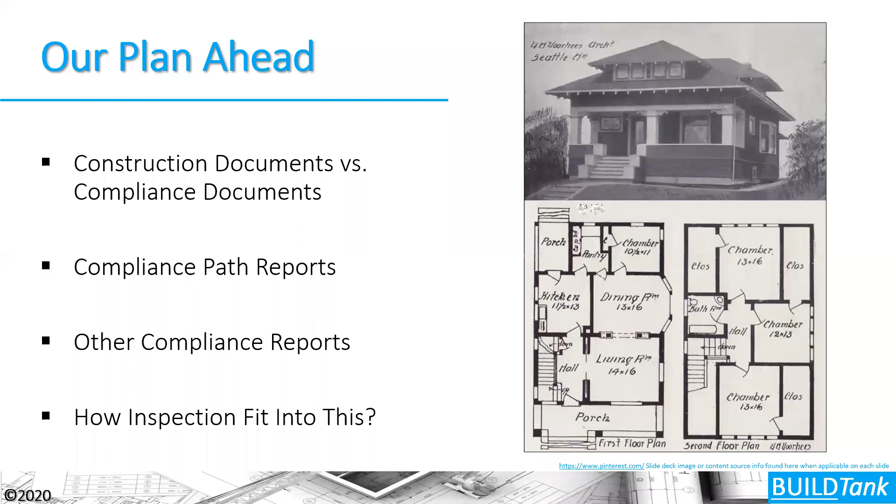So our plan today is to talk about the construction documents versus what we call compliance documents, making sure we have a good understanding between the two. We'll talk about the different compliance pathways and the compliance reports that go with those different pathways, other compliance reports, and then ultimately how field inspections fit into all of this.

As we know, jurisdictions are out there working with builders and developers to build houses. They have to look at a lot of things, and we also know that they're really not able to look at everything that the code is asking them to look for. So if we can look at and understand the compliance reports, we'll have a way to work our way through code and ensure that these houses are being built properly, without having to look at every single thing in the field that we don't have time to or don't understand.

They talk about 10 steps that we need to focus on for successful compliance, beginning with knowing which code is applicable for that particular project.

That's really interesting for a state like Colorado, where I'm based. Being a home rule state, each jurisdiction is basically on a different code. In the Denver metro area, we have about 30 plus jurisdictions, each doing their own thing. So it's very important to know which codes you're working with.

Choose the compliance path within that applicable code. Know the requirements of that applicable energy code and pathway. Design a building to meet those requirements. Document the design in the plans and specifications, and we'll add their compliance reports. Construct the building to meet the specifications, then document that the as-built building is actually built per those specifications. Then ensure that the as-built building performs and operates as ultimately intended.

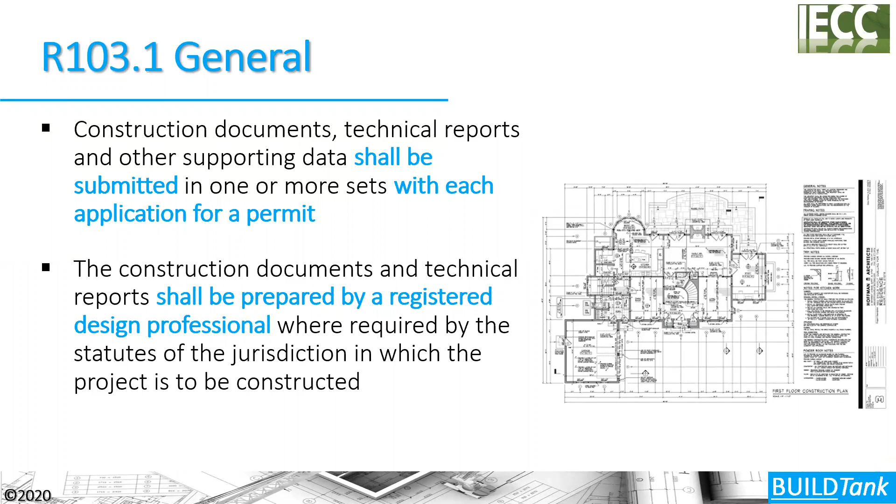They're talking about the plan set that is used to create and build that specific home from. But there's this whole other set of documents that have to be looked at too, and those are called compliance documents - we'll get to those in just a minute.

What we see is that construction documents are developed to help the contractor understand the accurate implementation of the design. These construction documents are multi-page documents. They include site plans, window schedules, sectional drawings, and other extensive details on how to flash window openings, for example. They're very important documents, but we also need to understand that they're not the same thing as compliance documents.

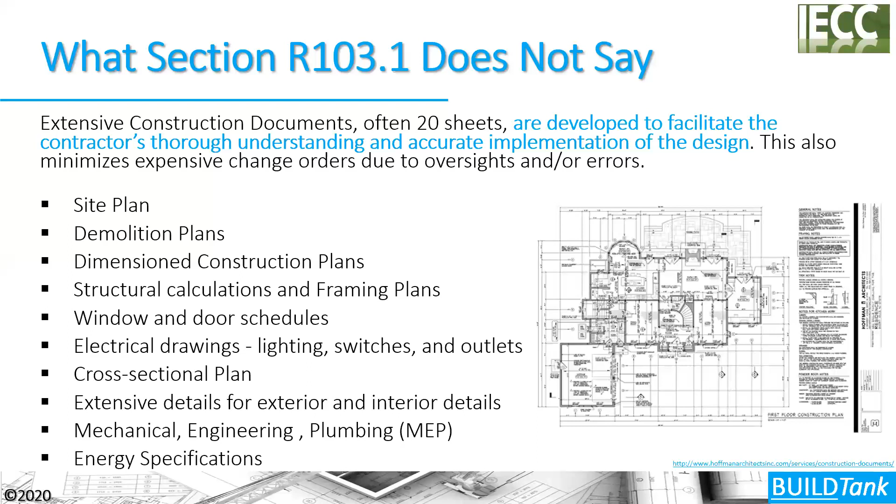These construction documents in and of themselves don't necessarily show that a home is compliant with the energy code. So compliance documents are not really discussed in the IECC, specifically not in Chapter 1 - they're in other chapters of the IECC.

The DOE says that we need to provide these documents to the code officials, yet most registered design professionals aren't the ones actually creating these compliance documents. We need to understand that it's a crucial step in ensuring code compliance, not only before the house begins, but in some cases to actually be able to issue that certificate of occupancy. We need to have that compliance document there.

So we need to submit the compliance document at the proper time, and ultimately that compliance document needs to be reviewed before the house continues in its process to get its final certificate of occupancy.

The types of compliance documents we're talking about would be an area-weighted U-value REScheck report, or there are other software that we'll talk about that develop that area-weighted compliance document, the code compliance report for the simulated performance path, and the energy rating index report for the ERI pathway through the code. We need to understand the difference between proposed and confirmed reports that are turned in at the process of permitting the house versus turned in at the process for getting the certificate of occupancy for the house.

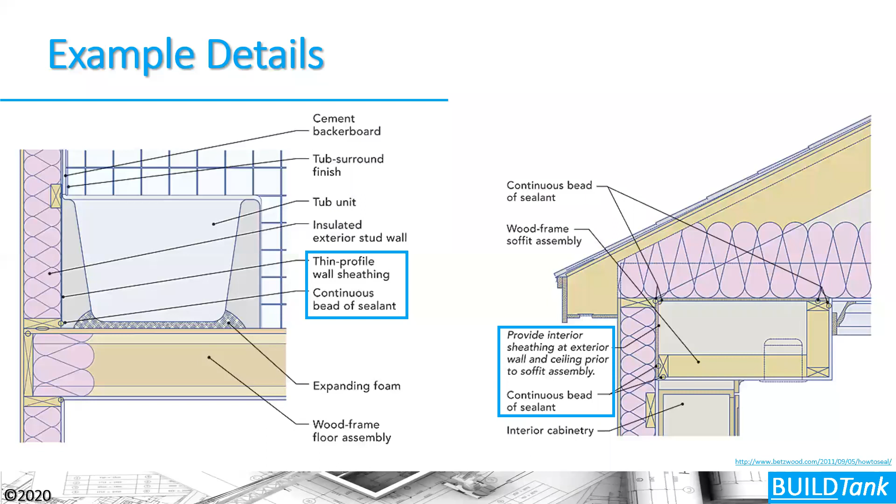These air sealing details are super important to have in your construction documents. They look like this so they can be executed properly in the field. We ultimately want things on those construction documents to serve as guidance for how to do things in the field. So to get that air barrier behind the tub on the exterior wall, to put an air barrier on the bottom chord of a truss and on that exterior wall, so that drop ceiling where the can light is located is all within the conditioned space of the house. Those are requirements of the code. These details help that implementation in the field, and as an inspector, we can go and look and ensure that those things are taking place properly.

Another thing added in the 2015 IECC is this section of the code that says the building thermal envelope shall be represented on the construction documents. This is just one example of how you might do that, but it's super important to have this depiction on the construction documents so that when it gets out into the field, the people actually constructing the house have an idea of what the designers intended, where that thermal envelope is.

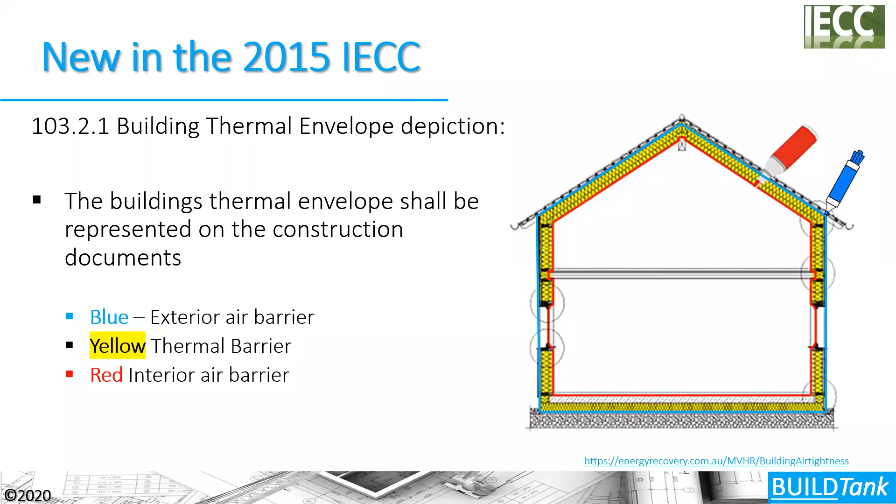We also need to understand at this stage that the IECC is super hyper focused on the thermal envelope and ensuring that it's executed properly, because so many things from a performance perspective are dependent on that thermal envelope. Not only comfort and efficiency, but remember that the HVAC design done before the house is built will not work unless that thermal envelope has been executed properly out there. So we want to make sure that is done well.

If we move on to Chapter 4 of the IECC, we see the different pathways of compliance talked about in this section. We have the prescriptive path, and within the prescriptive path, the UA trade-off path is part of that, but I like to break it out separately because this section of code utilizes software, while the true prescriptive path just utilizes the R value and U value table there. So we're going to talk about 4 compliance pathways: the prescriptive pathway, the UA trade-off pathway, the simulated performance pathway, and the energy rating index pathway, and talk about the different compliance reports needed for these different pathways.

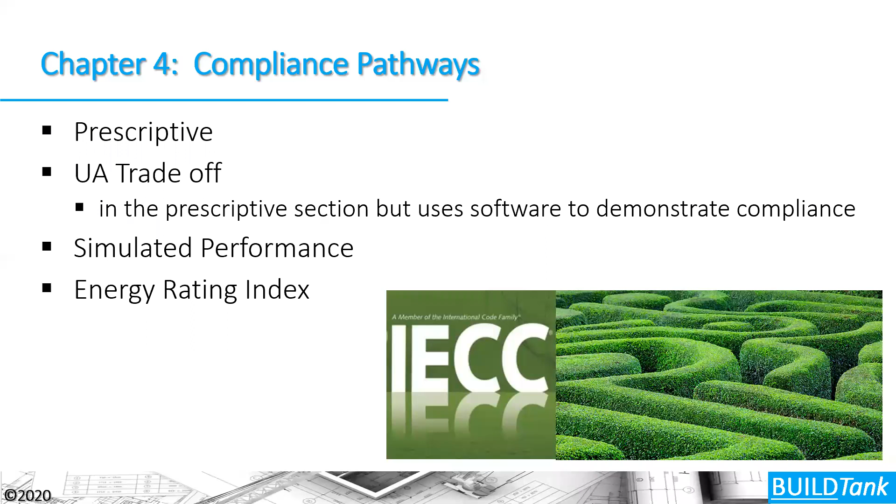If we begin with the prescriptive pathway, we see that it's the most restrictive pathway. Your only option is to do better than what's outlined in the R value table, which we'll see in a second. There's no true compliance tool for this - it's just a declaration that you make on your permit set of construction documents.

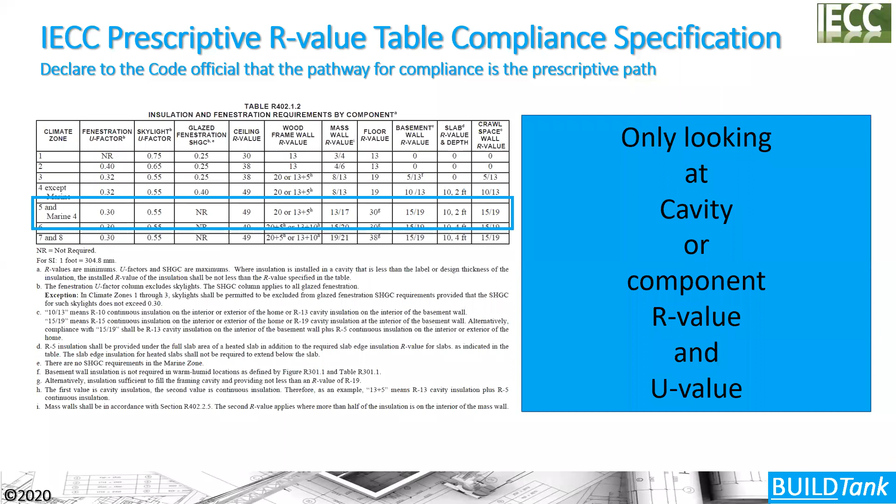So if we move over to the walls, we see that R20 wall cavity insulation needs to be installed. I can't go below R20, but I could go above it in this pathway. And again, the compliance document is the declaration made to the code official through your construction documents.

So what we're starting to see now is that an energy page is being added to our construction documents to be able to fully declare that you're using this prescriptive path. The reality is that this type of energy page is being used for all the compliance pathways. And in the 2021 IECC, there were proposals that passed saying you have to formally declare the compliance pathway at the time of permitting, which is not actually required right now. Some jurisdictions might require it, but on a national scale, it's not required.

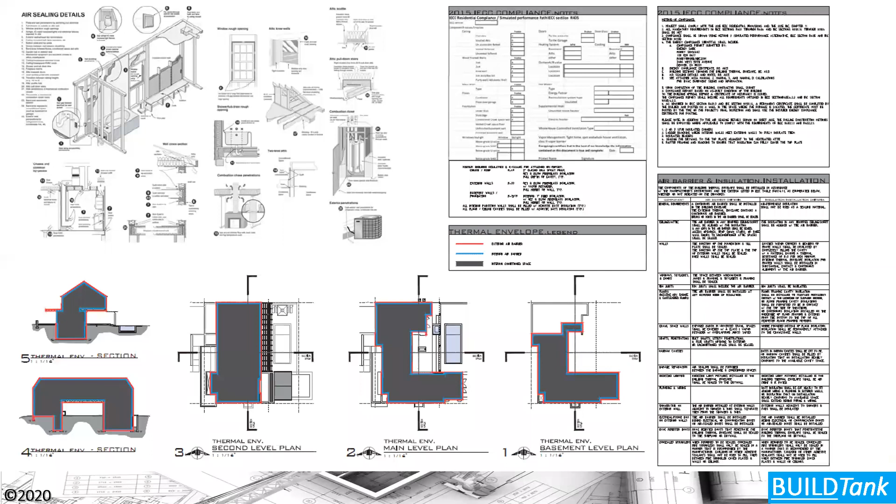So this type of energy page, we're going to break down and show you the different pieces here and how it helps demonstrate compliance.

First, here's an example of the depiction of the thermal envelope of the house. You see the blue lines and different lines here so that we can get an idea of where the architect or designer wants that thermal envelope to be. So most often you'll see it on the sectional drawings of the house.

These are air sealing details. This happens to be a Department of Energy air sealing poster that some builders or designers are adapting and using in their construction documents because it has all the main details that are talked about in the air barrier and insulation table there. Here's just a simple Excel document that documents all the R values and U values.

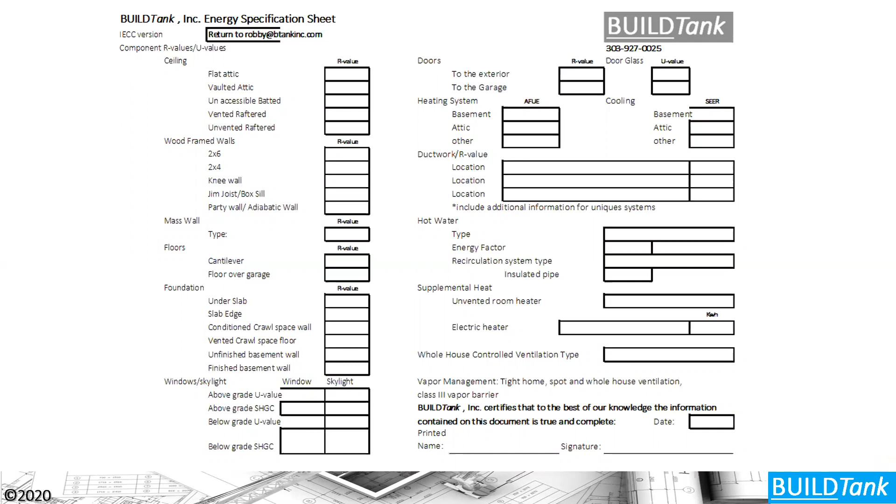These have to be in alignment with the insulation R value table of the code, what mechanical systems are in that house, what types of windows are in that house, and then if you're using third parties at all, potentially a signature would be needed.

And then there's some written part of this particular compliance document or code sheet in the plan set that is talking about other mandatory features of the code.

Do you realize that 2 or 3 stud corners are a mandatory requirement of the code? That insulated headers are a mandatory requirement of the code. This designer wanted to ensure that that information got out into the field and that their plan set documented that, so that they, to some extent, covered themselves, but also ensured that that knowledge got into the field and things got implemented correctly.

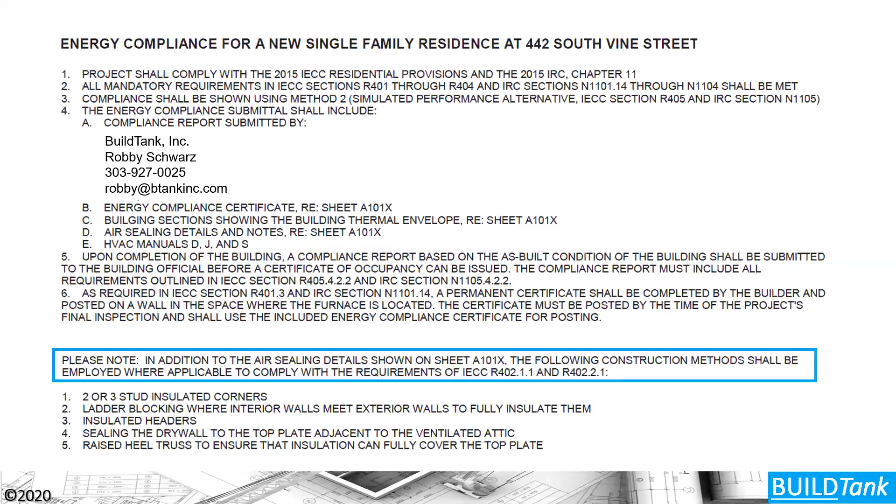So again, an energy sheet on your plan set can make a lot of sense, a good way of transferring information, but some of these things are mandatory requirements, like the depiction of the thermal envelope on the code.

Now, the U-factor alternative pathway in the code is unique for a couple of reasons. First of all, it's talking about an assembly of things. The U-factor that are in these tables is depicting an assembly U value instead of a cavity R value.

But what I want to demonstrate in this particular slide is that they're equivalent to each other. The R value in the R value table and the U value in the U value table are equivalent to each other. And I'm going to use the wall framing U value here as an example of that.

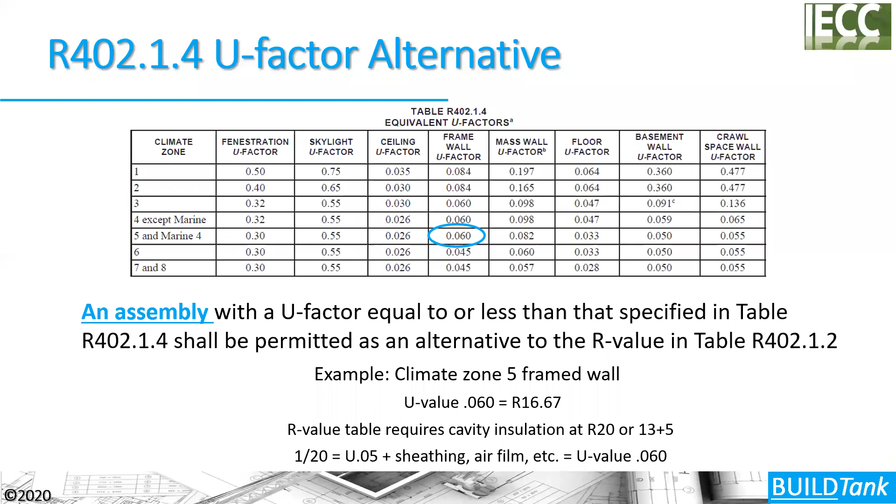So if you take the reciprocal of the U value, you get the R value. In this case, the 0.06 is equal to about an R17 wall. And if you take the reciprocal of the R20 from the R value table, you get a 0.05. So the difference between the 0.05 and the 0.06 in the U value table is the different layers there, the sheathing, the air films, all those other things give you that 1/100th of a U value.

So the reality of the U value table is that the U value table is needed in order to do software calculations. You can't basically do the mathematics that you need to do in software using R values. You have to convert those to U values, and that's really why that U value table is there.

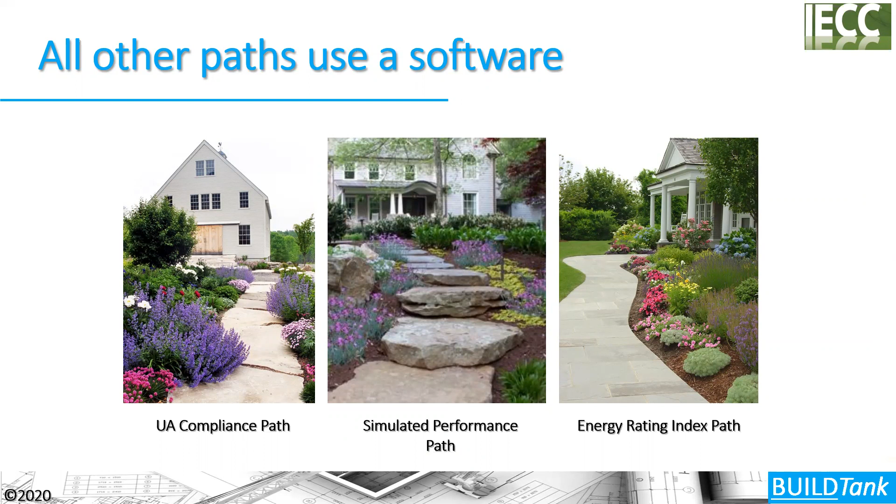And all these other pathways in the code are using softwares. The UA compliance pathway is using software, the simulated performance path, and the energy rating index pathway are all using softwares there. And how do the softwares work?

Well, ultimately, the softwares are trying to determine a delta T location. Delta T is the temperature difference. And in essence, what softwares are trying to do is create a temperature difference between inside the house that's defined by the thermal envelope, to outside the house, to ambient conditions outside the house. So the software describes the thermal envelope and its location, delta T, to ambient air and dirt.

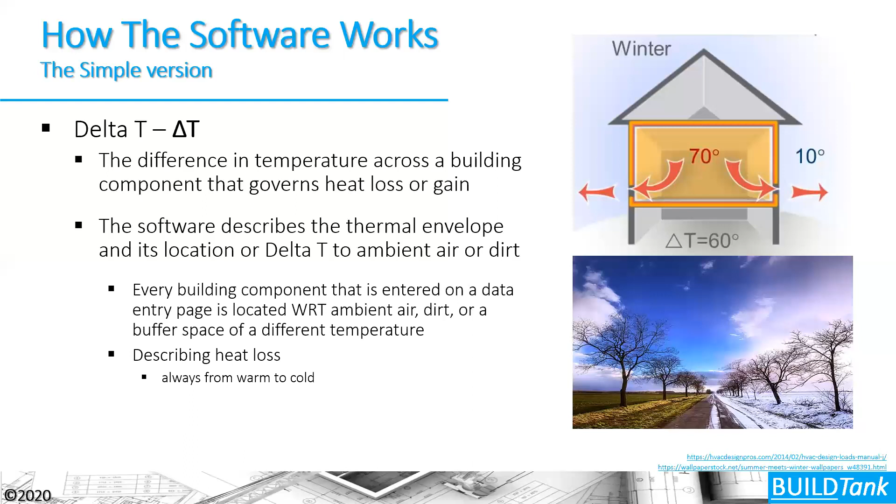Every building component is entered into the software, along with its location with regard to ambient dirt or ambient air, or what we call buffer spaces. This describes ultimately our heat loss or heat gain. Remember, heat is always moving from warm to cold. So that's ultimately what the softwares are doing.

The softwares continue by creating a reference home, which is compared to the home that we're actually rating or looking at from a code compliance perspective. The reference home is defined as a standard set of house specifications that generate a specific, consistent, and quantifiable energy performance, as defined by the code.

However, there are different types of reference homes. There are reference homes for the UA compliance path, the simulated performance path, and the ERI pathway. There's also a RESNET HERS ERI reference home, an Energy Star reference home, and building programs through utility programs have user-defined reference homes.

So how that is done is what we call the twin house concept. We have the reference home compared to the builder's home in this specific case. These two houses inside the software are geometric twins of each other. All the geometry is entered once, but two houses are basically created inside the software that are geometric twins of each other. The reference home is overlaid with the IECC prescriptive envelope R-values.

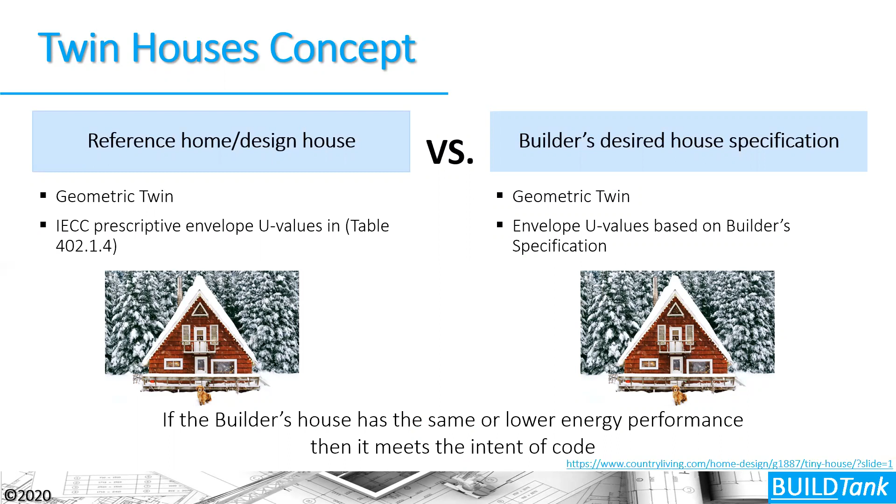You use the software. For the total UA alternative pathway, there happen to be 3 or more softwares. These are the 3 main softwares out there that can demonstrate compliance: REScheck, REM/Rate, and Ekotrope. We often call these reports a ResCheck report, but the reality is that ResCheck is the software, not the compliance report.

I'm going to start with the ResCheck report and look at what we need to check if you're going to get this report for the area weighted U value compliance metric. The first thing we need to know is what code we're working with. In this case, we're working with the 2012 IECC.

We need to know that ResCheck only supports the last 3 editions of the code, so the 2012 will fall off as the 2021 cycle comes on. You won't be able to use ResCheck for older codes, which is basically an incentive for jurisdictions to keep moving forward.

We want to double check the locations and conditioned floor area, glazing, and all these different things that are talked about in the project information. Ultimately, this first page is telling us if this house complies or not, showing compliance if it passes or fails the UA trade-off path.

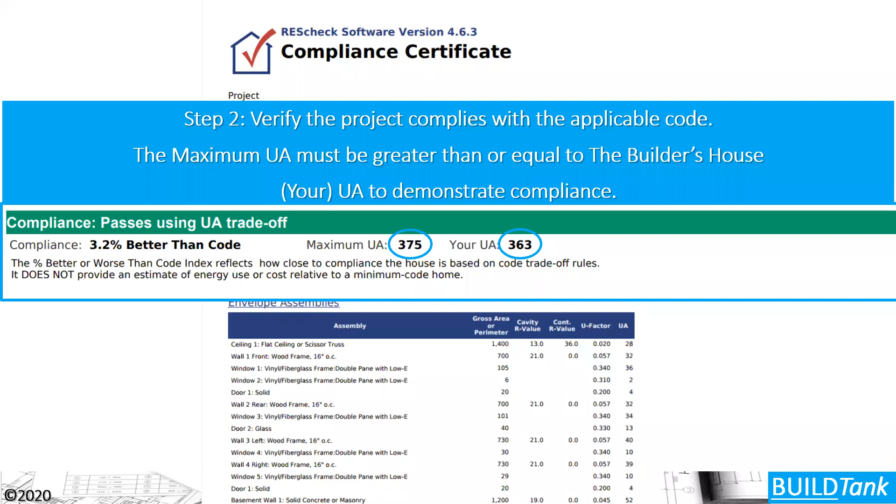That's not all we need to look at, however. We want to make sure that they created this report well, so we want to look at some of the envelope inputs that were done for this report. We can look at the envelope assemblies and see what different features they used in that assembly.

For example, if this house had a vented crawl space, then the crawl wall would not be part of the building envelope and should not be shown on the report, because your thermal boundary would be defined as the floor system above the vented crawl space.

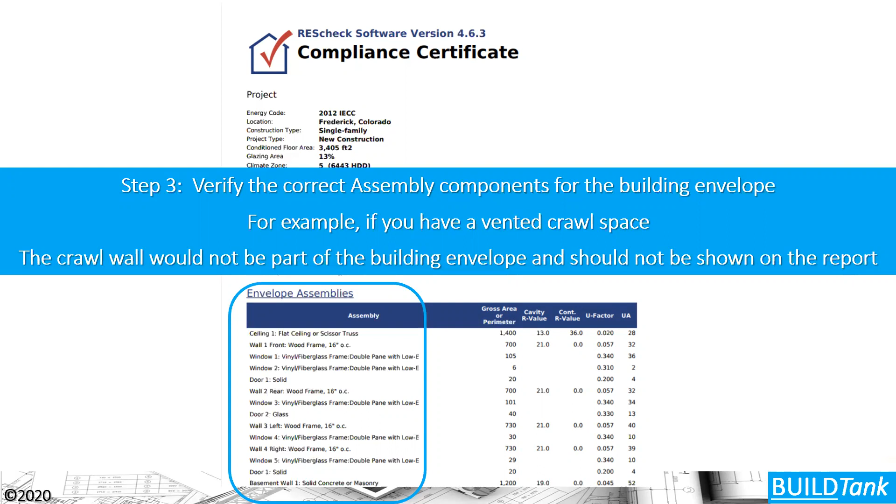Those types of things should be looked at and reviewed when you're looking at this compliance document. Next, you might look at the gross areas to make sure they did their takeoffs right and didn't make a mistake when typing it into the system here.

For example, the ceiling, flat ceiling or scissor truss ceiling is 1,400 square feet. What if they accidentally put in 14,000 square feet? That could make a big difference in compliance. So you want to double check quickly that their takeoffs were within range. They don't have to be exactly matching between different people. If you had 9 people doing takeoffs, you'll probably get 9 slightly different answers, but they need to be within reason there in essence.

Next, we want to verify the R values and U values that they entered here. When you enter the R values, they get converted into U values. If you're entering window U values, they just stay as U values. But ultimately, you want to verify the R values shown on the building plans meet the R values being depicted here on the compliance report.

What's interesting here is how things are entered into the different softwares. So this is a flat ceiling ventilated attic, so there is some cavity insulation and some continuous insulation. From the bottom chord of the truss, in this case a 2x4 bottom chord, that blown insulation that fills the cavity between the bottom chords of the trusses, that would be cavity insulation. And then the insulation that covers the bottom chord of the truss, that would be continuous insulation.

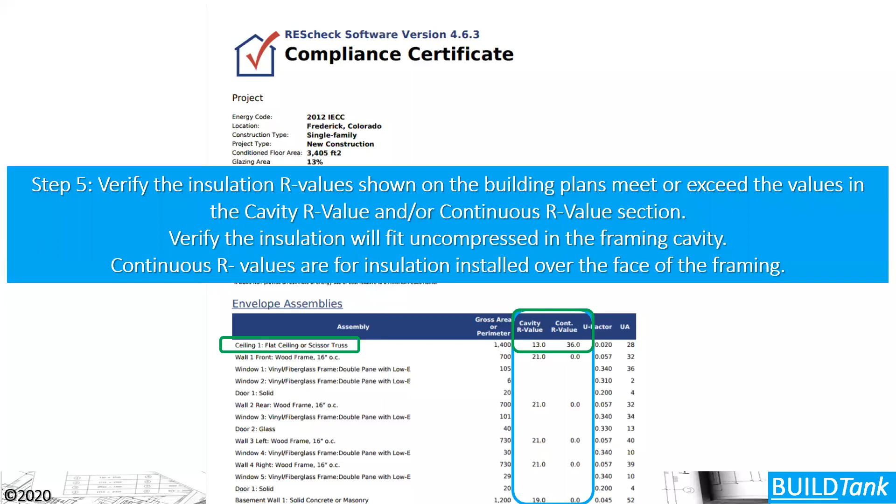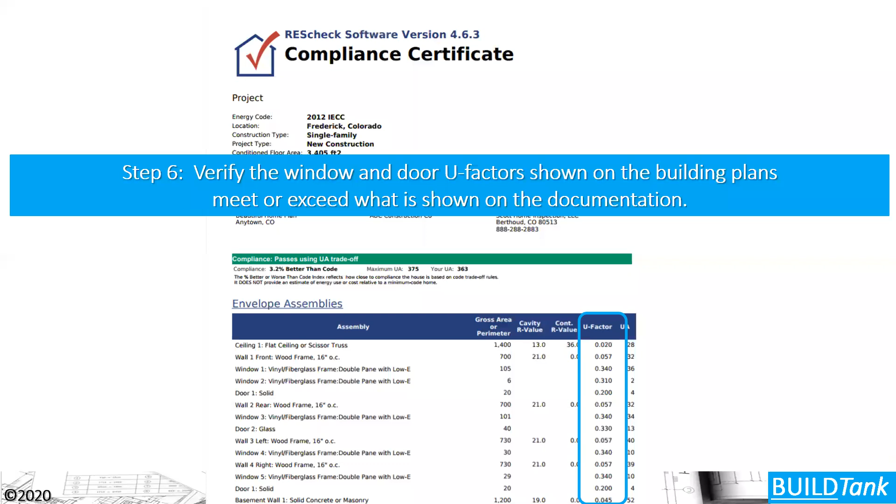In this case, they have a total R49 installed in that attic, and you can see how it gets converted into the U value there as well. So the next thing you would check would be those U values to make sure that happened correctly in the software calculation. You could also look specifically at windows, because windows are only entered as a U value there as well.

Now, as I was saying before, ResCheck is one of many softwares that can create these UA compliance reports. So what I've put up on the screen here are compliance reports for the UA compliance path from Ekotrope and from REM/Rate, two other softwares. These are valid and can be turned in for compliance of the code.

They look a little bit different than ResCheck reports, but they also give all the information you need, starting with demonstrating that this is a projected report. In the UA compliance pathway, it only asks for this report to be turned in for permitting, so it's projecting what will be carried out in the field. We need to be certain we're looking for the inspection status that's projected on these reports.

We have the reference home detailed out here, showing the area weighted U value of the reference home and what the designed house, or the builder's house, is. We're looking for the designed house to have a lower or equal area weighted U value to the reference home. In both these cases, that's true, and in both cases we see they document that the as-designed house meets or exceeds the requirements of the prescriptive compliance path using area weighted U values.

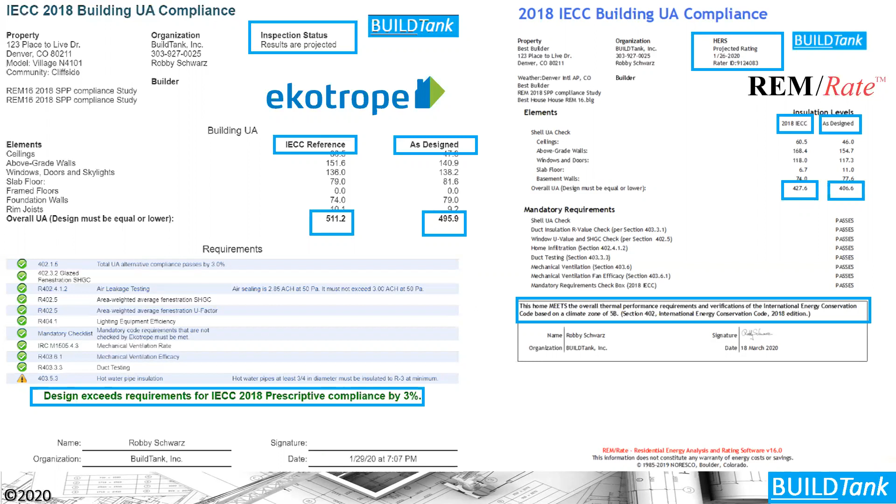Now, what this report doesn't do is give you the details of the assemblies used to demonstrate compliance, so you're going to have to get a separate report. The code calls for an energy code inspection checklist that gives you that information, and from all of these softwares you can get an energy code inspection checklist. This is just an example of that checklist.

So the checklist gives the property information. It also gives the status again, the results showing this is a projected report that hasn't been confirmed out in the field. It also gives organizational information, who actually created these reports, and then it gives general building information.

Again, this might be something you want to confirm, that the conditioned floor area and the volume are within range to what you might get when you do a takeoff of the house. This section I'm going to blow up and read because it's interesting, and not a lot of people actually spend the time to look at it on these compliance reports.

This says that the building energy model in Ekotrope reflects the building assemblies and energy features listed below. Sometimes energy features will change in the field from what has been modeled. The inspection process should identify any changes and ensure that the home continues to meet the applicable energy code. So again, being a proposed document, you have to wed this document with your field inspection to ensure you're getting a compliant house there, because things might change.

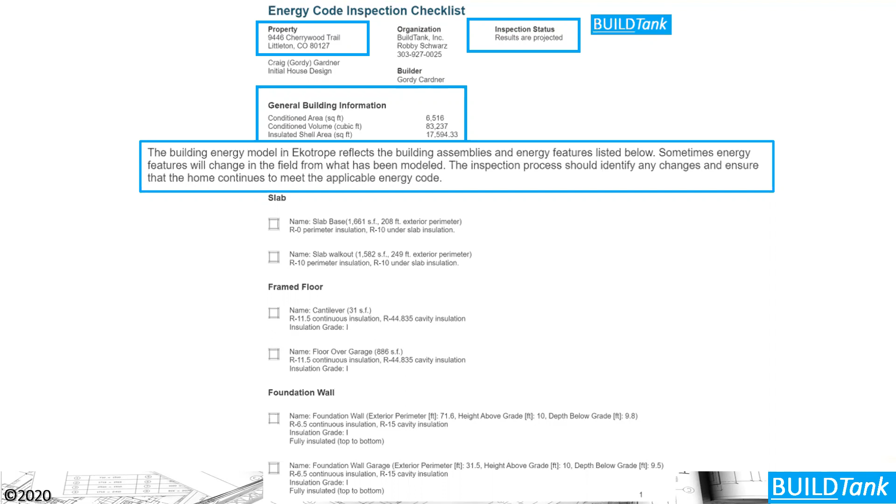We see that often in houses, especially with windows or sometimes even with insulation in different components of the cavity. They might say they're putting in a 0.34 window in the home. You go out there for inspection, you actually see that the predominant windows are 0.32. Well, that's better then, so that's okay. But what if they were 0.36? Would that still be compliant with the code? We need to look at that from a field inspection perspective using this pathway in the code.

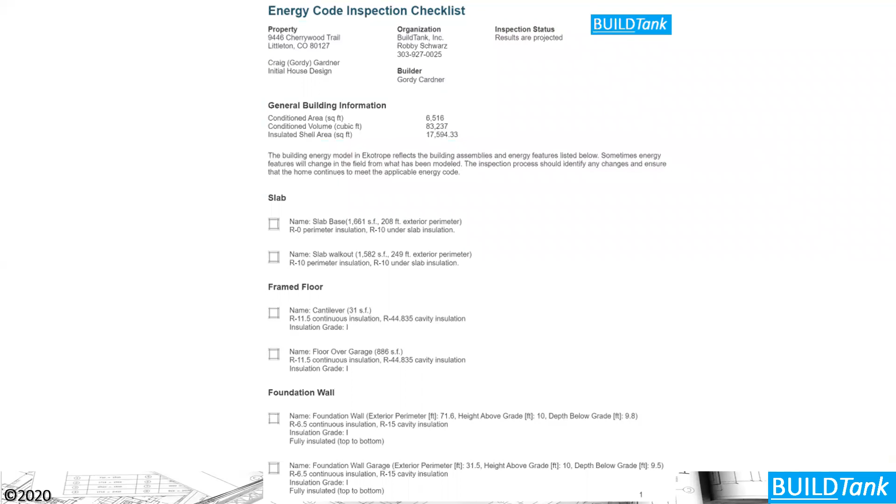Now this checklist goes on and talks about the different components of the checklist, and we'll go into those in a little bit of detail. In this case, we're talking about slabs, and it gives us an example of the square footage of those envelope components. In framed floors, it gives us an example of the R values used in those components. And then we also get indications of cavity and continuous insulation used in those different components to demonstrate compliance here. So we can use this checklist in the field to work our way through the house and demonstrate compliance with the area weighted U value pathway.

Now the Energy Code inspection checklist also talks about mechanical systems and mechanical ventilation. If we blow that section up, we see that mechanical ventilation has been modeled and needs to be looked at in the field, and the mechanical equipment for heating, cooling, and water heating has been included in this report so it can be confirmed during inspections out in the field. So these compliance documents not only need to be looked at for permitting, but we need to look at them also when we go out in the field and inspect the house to make sure that they relate to each other.

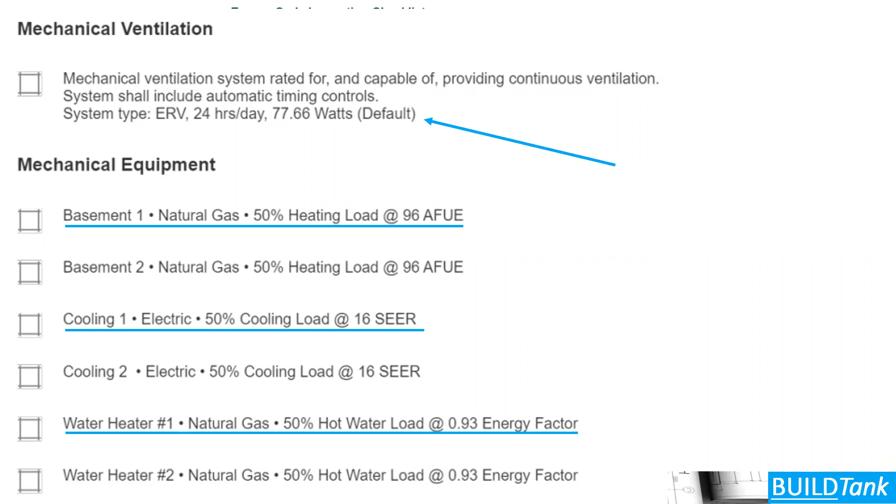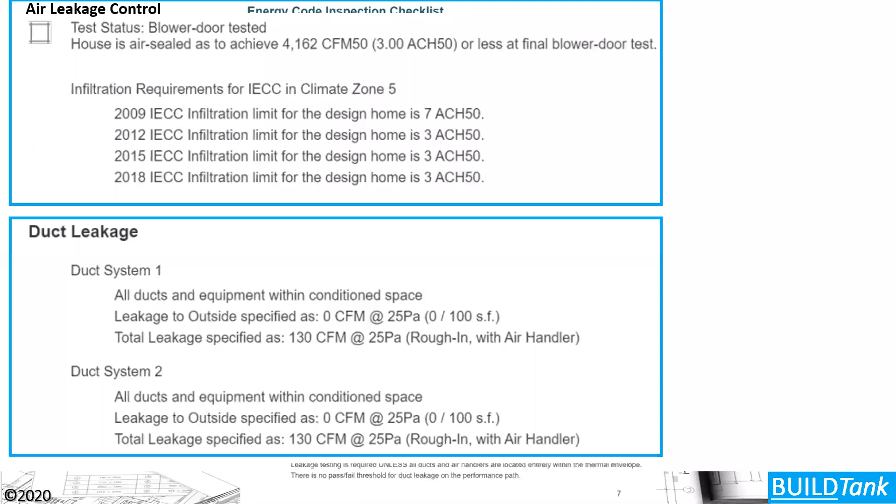Lastly, this inspection checklist looks at air leakage and duct leakage sections of the code. Air leakage is now a mandatory test that has to happen in the code. Duct leakage is dependent on where the ducts are located, but this section of the checklist is reminding us that we need to look at those compliance reports, and those reports most likely are going to come at the end of the process. So you're going to need to look at them before the certificate of occupancy is released for that particular house.

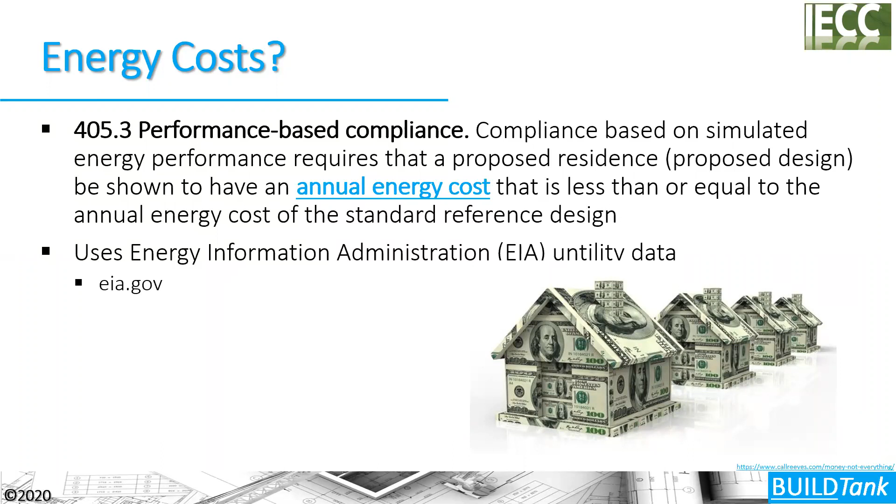Okay, so now let's move on to the simulated performance path and look at the reports here. Now the simulated performance path is also a software pathway through the code. Instead of using annual or area-weighted U values as the compliance metric, it's using annual energy costs as the compliance metric to demonstrate compliance here. So again, the rated house has to have less than or equal annual energy costs than the proposed house or the reference home for that particular house.

Now the compliance reports are detailed out in more explicit detail in this pathway than in the area-weighted U value prescriptive pathway. The compliance software tool generates a report that documents that the proposed design complies with this section of code, but it goes further and says that the compliance reports need to include certain things in order to issue the building permit, and that's in section R405.4.2.1. And then also that you have to submit a compliance report to get your certificate of occupancy, and that's detailed out in section R405.4.2.2. So let's look at these reports a little bit.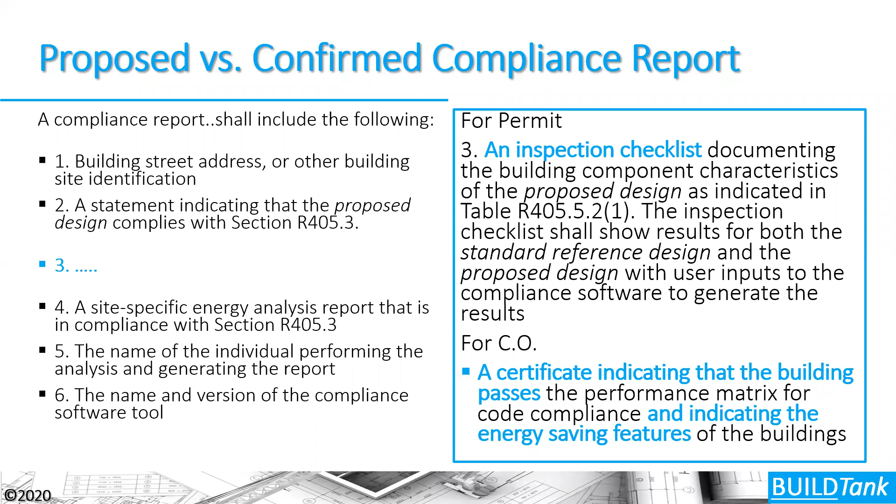They need to review those confirmed reports as well. So compliance reports for the proposed design show that it meets. We have the property information here, the status showing this is projected for the building permit, and this report shows that it meets or exceeds. We're using annual energy cost, and we have to show that the as-designed annual energy cost, $1,034, is less than or equal to the reference home at $1,086. Therefore it meets the code—in this case, 4.8% better than required.

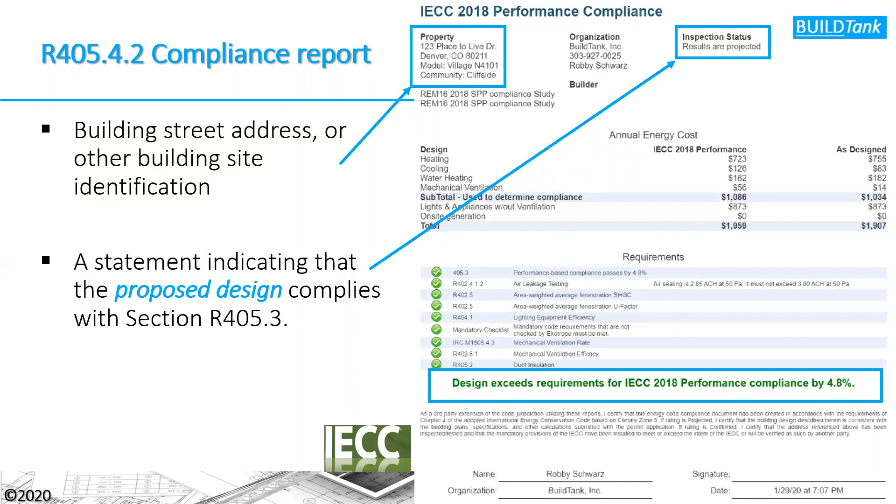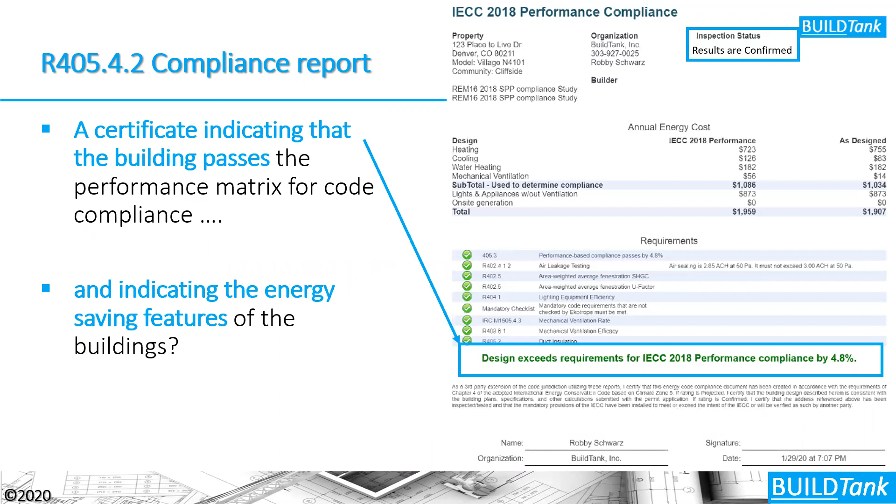The certificate indicates that the building passes, which we showed again here, and it indicates that it's confirmed in this case. So the compliance report for the certificate of occupancy is the same report we showed for permitting, but the status changed—it now shows results for a confirmed house, not a proposed house. Things have been looked at out in the field in that case.

Now, it also says we have to indicate what the energy saving features are. There isn't a specific report in any of the softwares that's suggested to demonstrate the energy saving features have actually been installed. So I chose the building specification summary sheet report to do that. I think it does a pretty good job of detailing the building shell features, the mechanicals, the lighting equipment, and the size of the house. It does the job we need.

You also want to ensure that the inspection status doesn't say projected—it should say confirmed in order to turn this in for the certificate of occupancy. But this is a good report to use for that purpose.

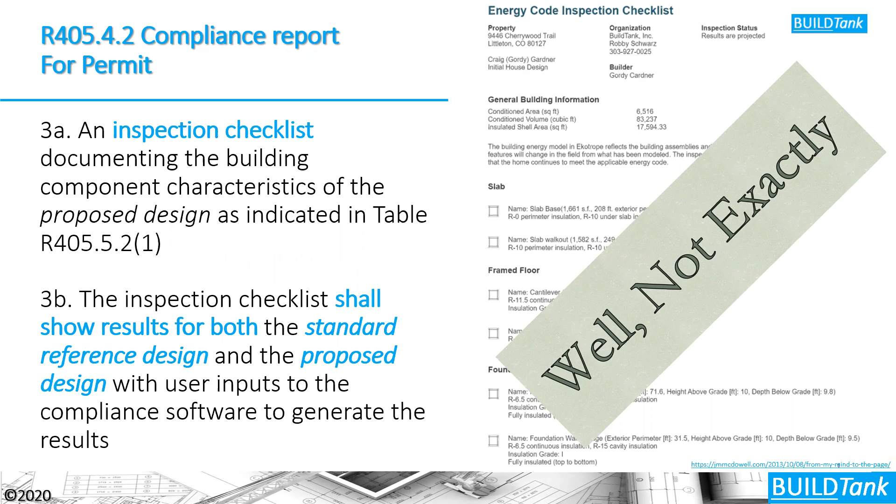Now, compliance reports for permitting—the inspection checklist, which we went over earlier, shall show the results of both the standard reference design and the proposed design. So that's a little bit different. You might turn in the inspection checklist, but you also need to turn in a different report, because the Energy Code inspection checklist doesn't do the second part, the 3B part, which asks for looking at the features turned in for the reference design and the proposed design.

So the softwares have the ability to break out the proposed home summary and the reference home summary. These reports are titled so you can know the difference between the two, and then you're going to have to look at what's actually been put into each location for the R values and U values in that particular report.

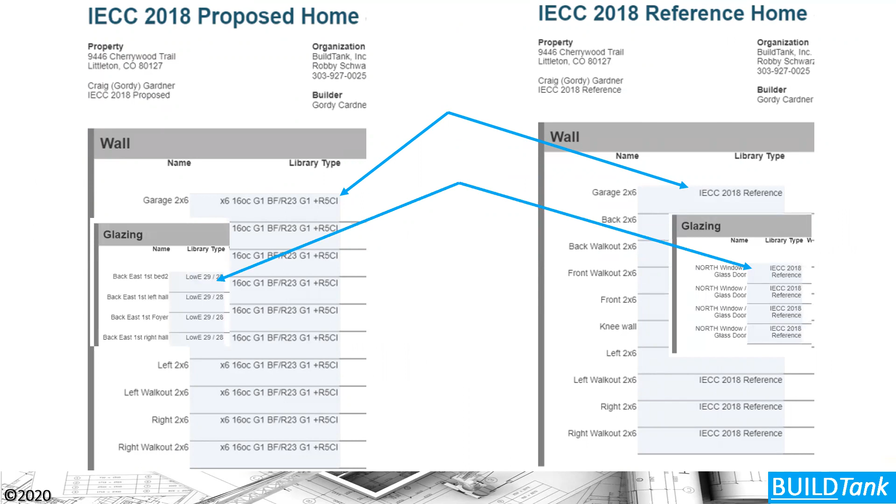Let's blow that up a bit more. We can see that the IECC reference home features were used in the reference home, and the proposed design, in this case, used the 2x6 wall R23 blown fiberglass grade 1 with R5 continuous exterior sheathing. This is for a cold climate, so it's probably not what you'd see down in Texas. We see similar things looked at for glazing, roof insulation, and whole house infiltration. All the different components to demonstrate compliance are broken out in these reports for the reference home and the proposed home, so you can see what was used in each component.

So that's the type of report the code is specifically looking for from the softwares, and they're obviously available in the softwares—they just aren't always turned in to be reviewed.

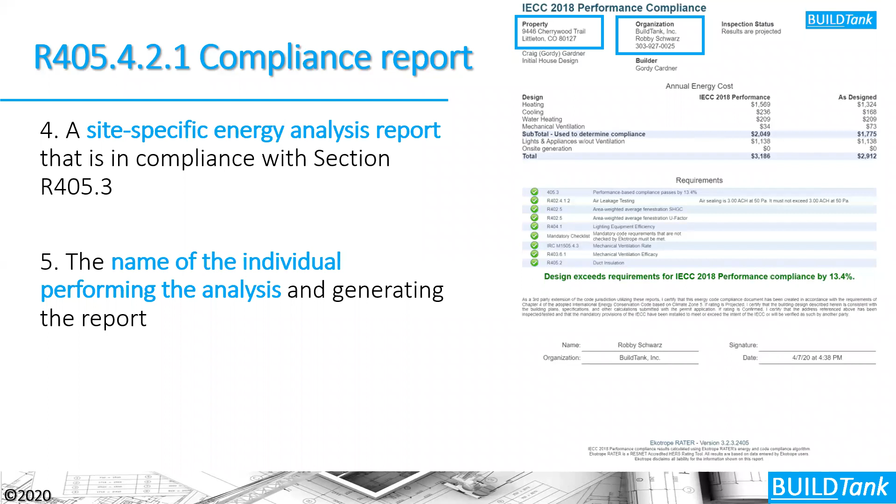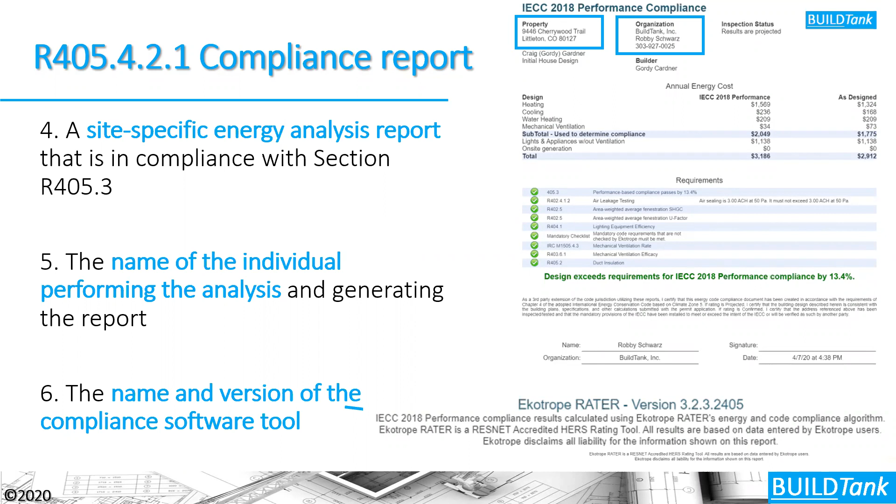Now, the compliance report is looking for a site-specific energy analysis report. This is the compliance report for the Certificate of Occupancy. So we have the property address, the name of the individual performing the analysis, and the software tool that's used. Making the text a little larger, we see that this report is generated by the Ekotrope RATER software, and the version number is listed there as well.

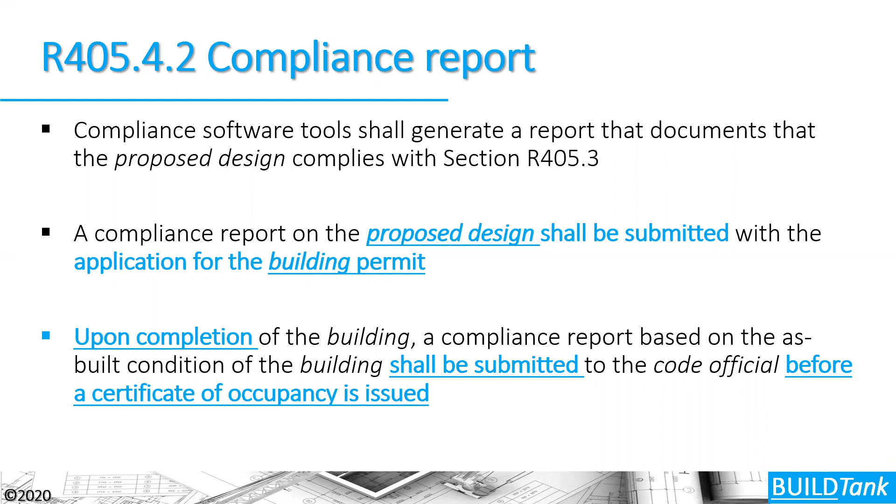The compliance reports, again, need to be broken out for the proposed design. It needs to be submitted for the building permit, and upon completion, the compliance report needs to be submitted for the Certificate of Occupancy to be issued and released.

So for projected and confirmed reports, we need to look at this section here. Is it for the projected reports, and has the report been signed? This section is one that a lot of folks don't look at, specifically because when you're confirming the house in the field, we need to understand who's actually doing that confirmation. So if a third party is doing this confirmation, we need to understand what this says.

I'm just going to read it out loud here: 'As a third party extension of the code jurisdiction utilizing these reports, I certify that this energy code compliance document has been created in accordance with the requirements of Chapter 4 of the adopted International Energy Conservation Code in Climate Zone 5 in this particular case' — that would be made specific for whatever climate zone the house was being looked at in. 'If rating is projected, I certify that the building design described herein is consistent with the building plan specifications and other calculations submitted with the building permit application. If the rating is confirmed, I certify that the address referenced above has been inspected, tested, and that the mandatory provisions of the IECC have been installed to meet or exceed the intent of the IECC, or will be verified as such by another party.'

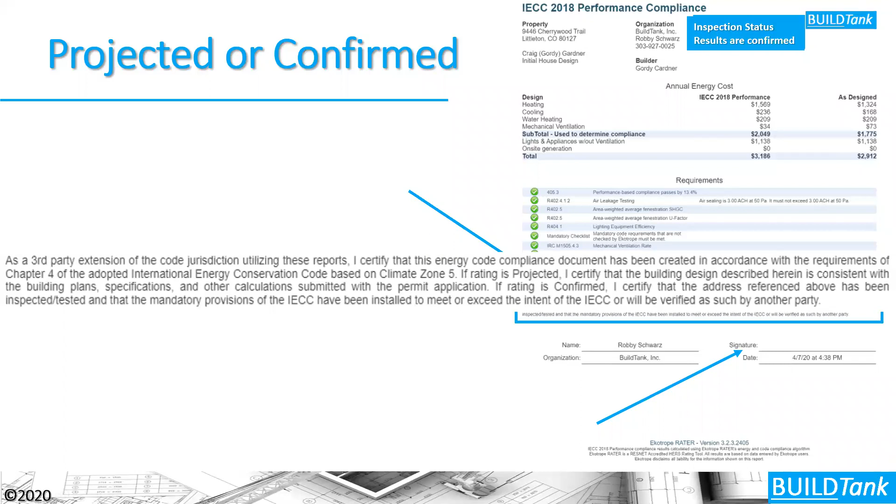Okay, energy rating index pathway. The first thing we need to understand is that the energy rating index is not the same as a HERS or ResNet energy rating index. So we have to be particular about our language and use adjectives to describe the type of energy rating index. When code adopted the energy rating index, they did that because ResNet's HERS index is a proprietary term, so they're not going to use HERS index.

We also need to understand that the index has changed from the 2015 to the 2018 to now the 2021 cycle. So we need to use that modifier that says we're talking about the 2018 energy rating index in this case, not a HERS index, not the 2015, and not the 2021 index pathway.

These are the scores required by the two different codes currently out there, the 2015 and the 2018. You can see the scores are different, but if you did a HERS index for a house complying with the 2018 energy rating index pathway, you'd see that the HERS energy rating index can also be different. I've seen it differ by as much as about 18 points from the code energy rating index. So it's important to know that you're talking about the correct energy rating index here.

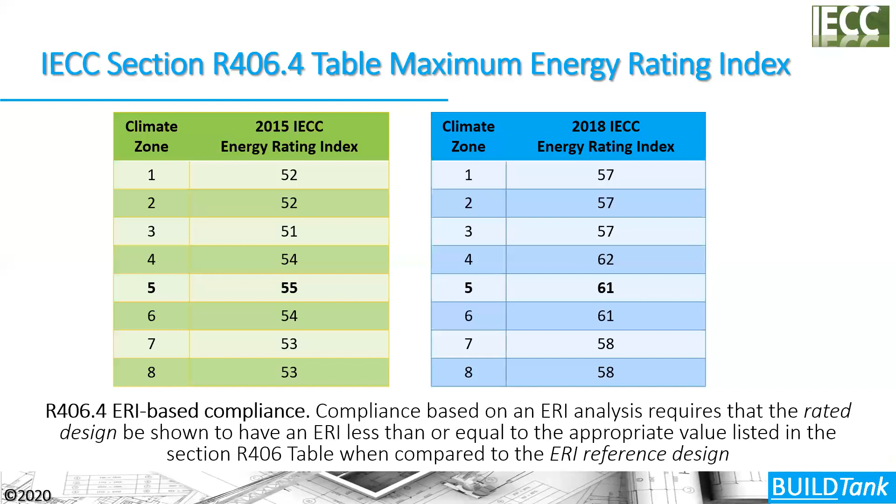So the compliance software tools — the code goes into a little more detail here, saying they shall generate a report that documents that the energy rating index of the rated design complies with the section we just talked about.

It also needs to list out the address and provide an inspection checklist. It needs to show the rated design, but also the reference design as well—both the ERI reference design and the rated design need to be documented in compliance reports. You have to document the individual who completed the reports and the name and version of the software as well.

So this is the true compliance report for the 2018 IECC. This is projected, so it should be turned in for permitting. Right now the IECC only says you have to provide one of these reports for permitting—it doesn't specifically say you have to turn in one confirmed for issuance of the Certificate of Occupancy. In the 2021 IECC that will be required, but right now it's recommended. I'd recommend getting one for permit and also one before you issue the Certificate of Occupancy.

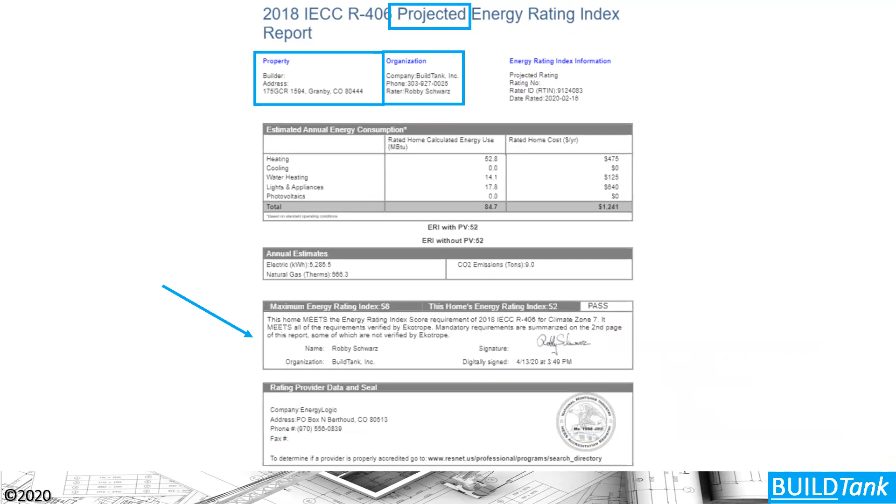We have the property organization—the people who created this document—the property address for that document, and then we ultimately show compliance. I blew that document up as well. It says this home meets the energy rating index requirements for this section of code. In essence, it scored 52 in this case without PV, which is better than or equal to the 58 required in this climate zone. So that needs to be turned in.

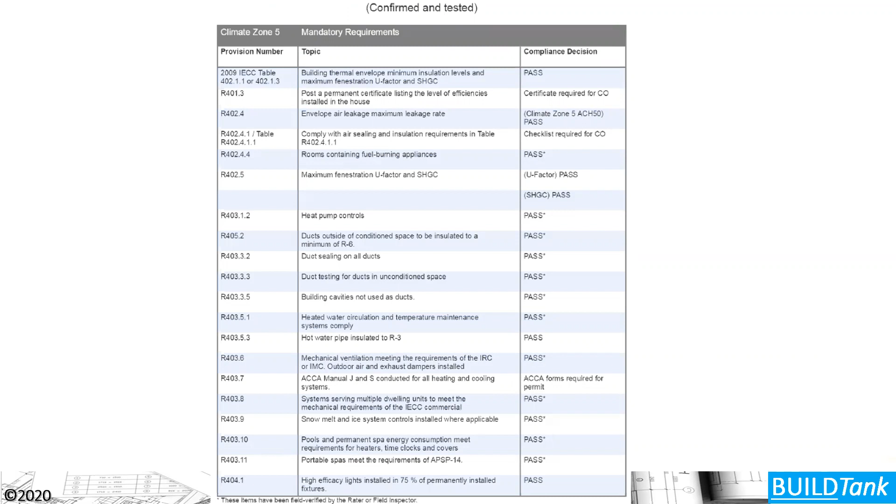The second page of this report talks about all the mandatory features that are required regardless of the pathway you choose to use, and this report will document those features and whether they passed or not.

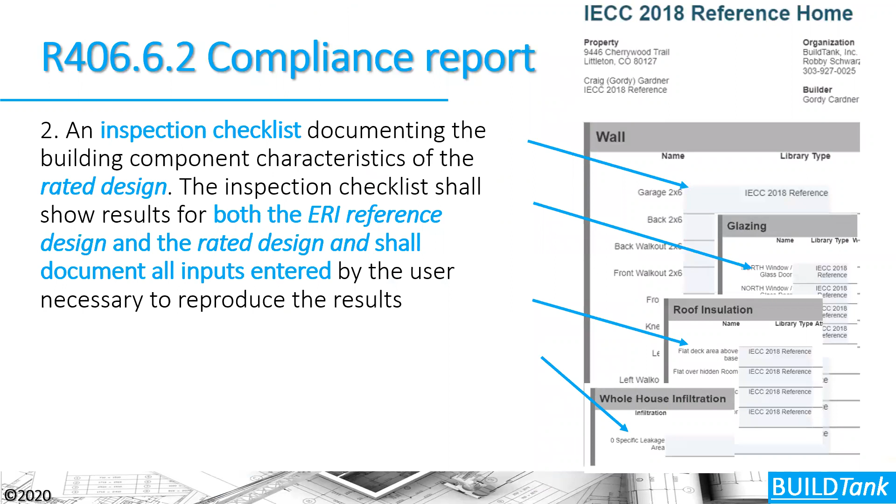Now the compliance report is asking for the rated home and reference home documentation here—that's the documentation we looked at before, the proposed home summary and reference home summary reports, looking at the different specifications for each detail from foundation, slab, walls, infiltration numbers, duct leakage numbers. All of those things are detailed out in these reports, and they should be turned in for permitting at minimum, potentially also for Certificate of Occupancy depending on the jurisdiction.

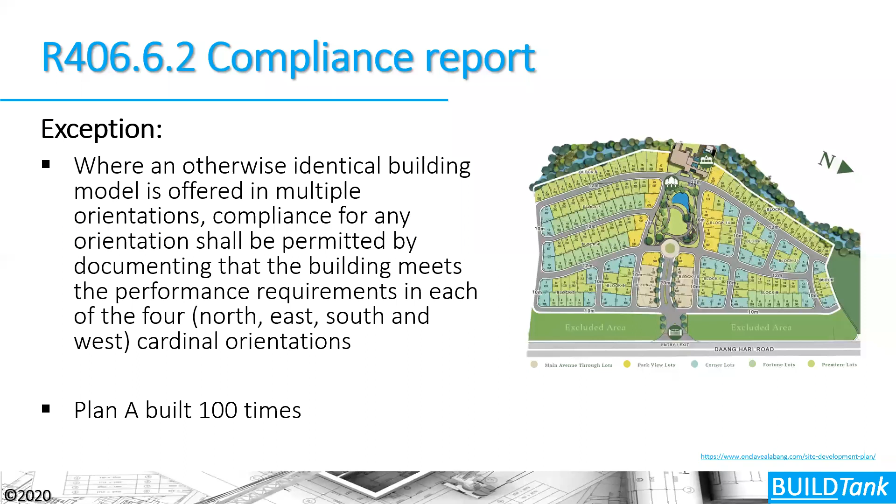There is an exception for the compliance report. It says that where an otherwise identical building model is offered in multiple orientations, compliance for any orientation shall be permitted, documenting that the building meets the performance requirements in each of the 4 primary cardinal directions. So if you build Plan A 100 times in a specific community, you don't need to turn it in 100 times—you can turn it in for the 4 cardinal directions and demonstrate compliance for permitting purposes.

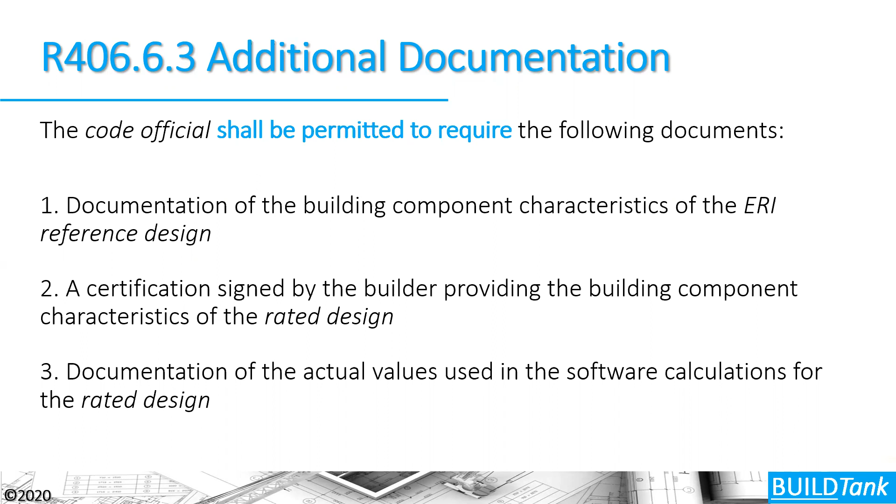Additional documentation—again, the code official always has the right to ask for additional documentation, and these are some examples of that: the reference design and the rated design, which we showed you, and so forth and so on.

Other reports needed to document compliance—let's look at those real quick.

Chapter 3 talks about needing documentation to prove what's actually been installed from an R-value perspective. So we shall provide a certificate listing the type, the manufacturer, and R-value of the insulation installed, specifically for insulation that doesn't come with an R-value mark. This is very, very important. Right now it doesn't specifically say when this document needs to be provided, but I always recommend it's provided at the time of installation of the insulation, especially if you're blowing your walls with insulation—who knows what the R-value of that blow is?

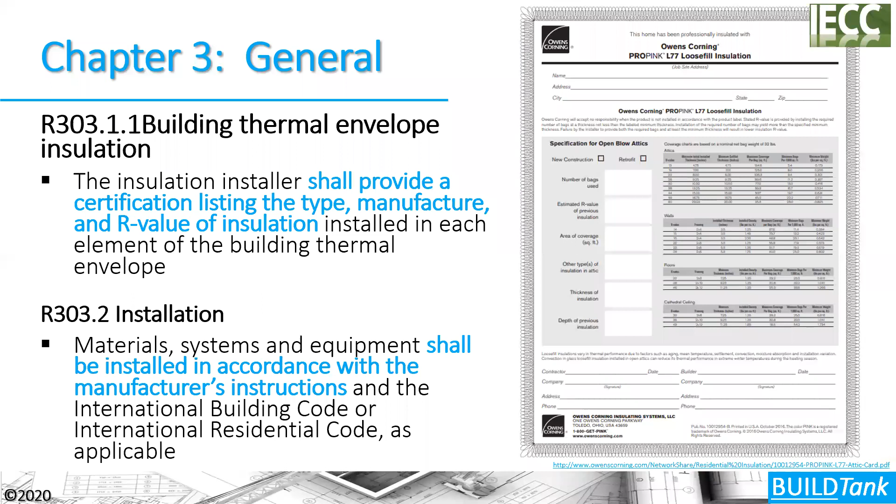So in essence, the installer is certifying with these types of documents what the R-value is, and also certifying that they've installed it according to manufacturer's instructions and the required density. This is a very important report to look at, especially now since we have so many installed materials where we don't know the R-value—there's no R-value mark on the material.

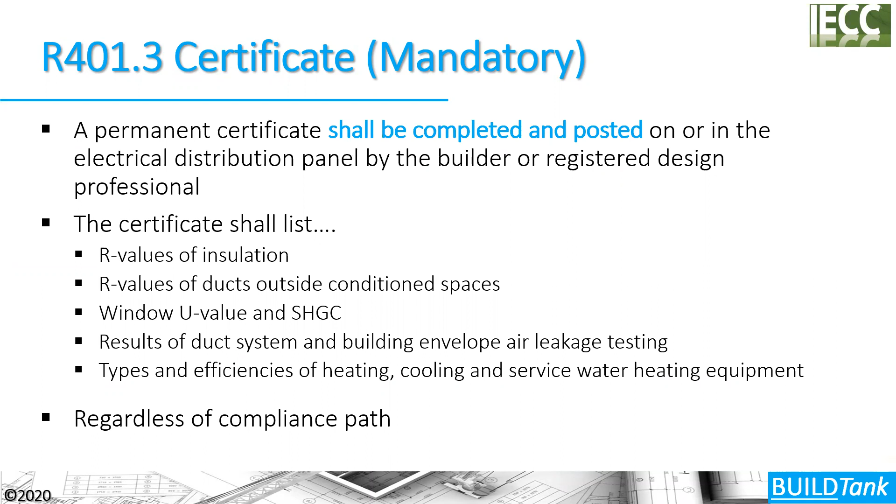Chapter 4 says a different certificate needs to be completed and posted. It says here in the electrical distribution panel, but we're seeing most people want it installed in a prominent location. This certificate needs to detail out the R values and U values of the building thermal envelope, the results of duct leakage and building leakage testing, the types and efficiency of the heating and cooling systems, and it's required regardless of the compliance path that is used.

Now, there isn't a standard way to create this certificate for the prescriptive path of the code, although it's also required for the prescriptive path. So we're getting all kinds of handmade certificates right now for that pathway of the code. But you do need to look for it.

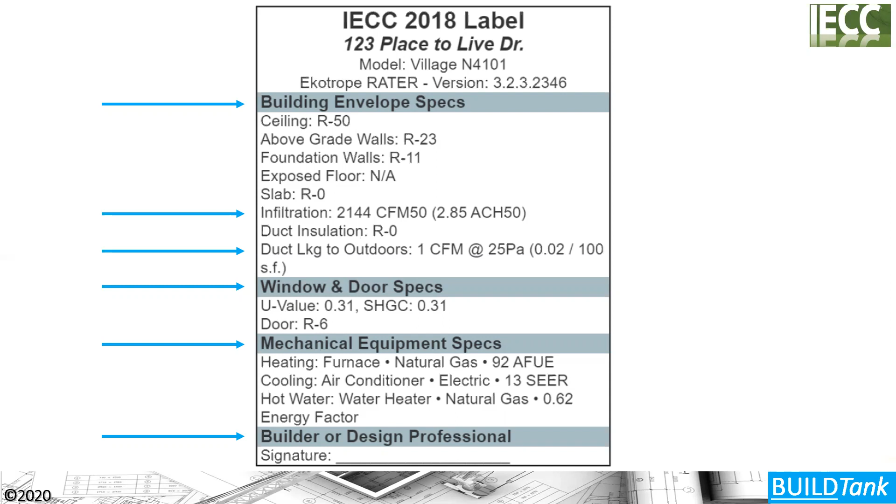And then you need your testing reports for your blower door test to ensure that it passed. This report needs to be looked at before a certificate of occupancy is released. We're seeing, unfortunately, some jurisdictions that aren't looking for it, and some that are issuing certificate of occupancy for houses that haven't passed. This is one example of a report where that information shows up, on this overall certificate that shows the house passed.

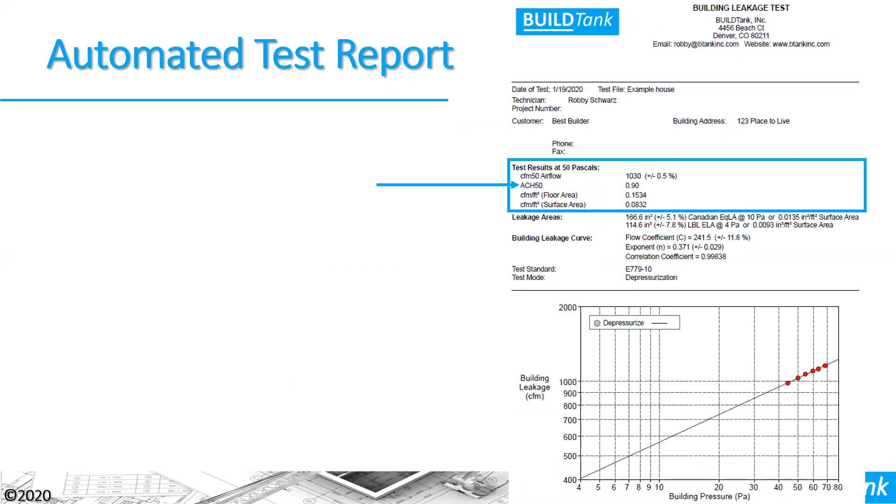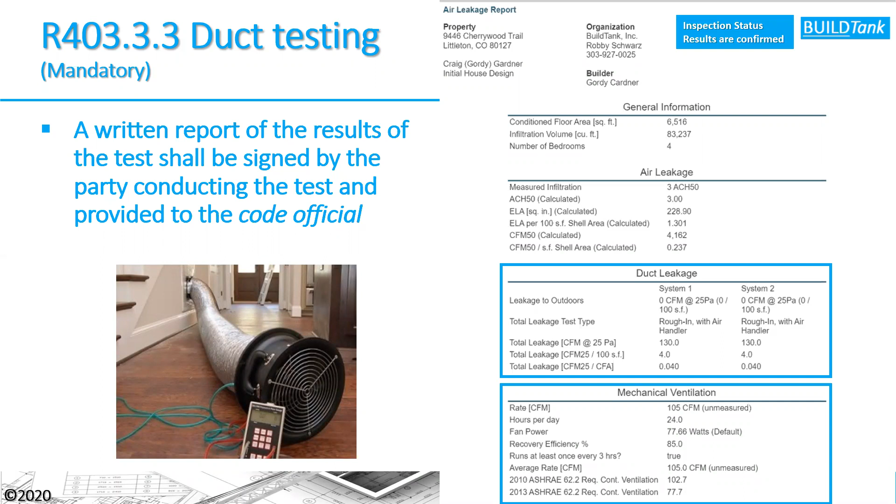A written report has to be given for duct leakage testing as well, if that's part of the code. Again, is it projected or confirmed? You want to make sure you have a confirmed report. It gives you the duct leakage testing results here, and in this case, it also gives mechanical ventilation testing, although that's not required right now. In the 2021 cycle, it will be required to actually measure mechanical ventilation and all ventilation in the house as well.

The HERS Index is an interesting report that often is turned in, although it's not a code compliance report. I just wanted to make sure everybody had a common understanding of the HERS index. So like a golf score, the lower the score, the better. You can think of it as a miles per gallon rating system for homes, so you can compare homes of different sizes and shapes.

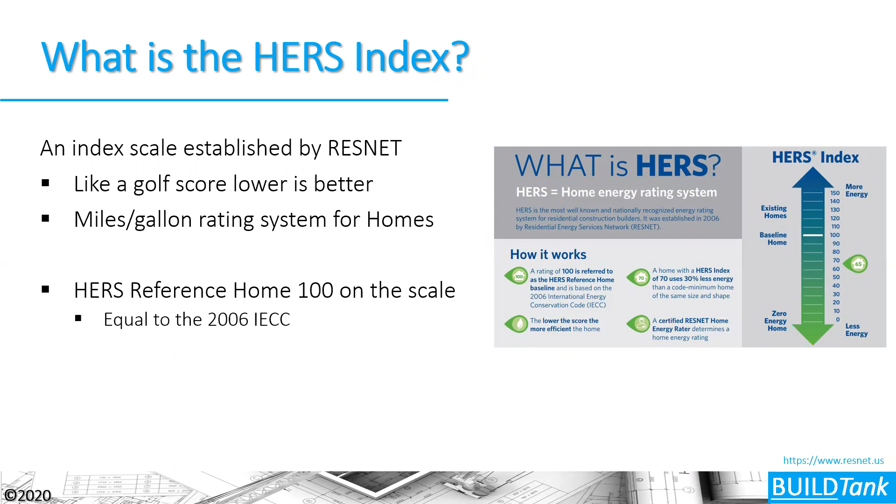The reference home is equivalent to a home built to the 2006 IECC, a house that scores 100 on the scale. A HERS index of 0 is a net zero home, a home that produces as much energy as it actually uses. The DOE has done research confirming that a house scoring 130 on the scale is equivalent to basically the average existing home out there in the market today.

So the energy rating index certificate, or home energy rating certificate, again is not a code compliance document, but it gives you some very valuable information. First of all, has this house been confirmed and registered in the National RESNET Home Energy Rating Registry? If it has, you can get additional information that I'll show you in a second.

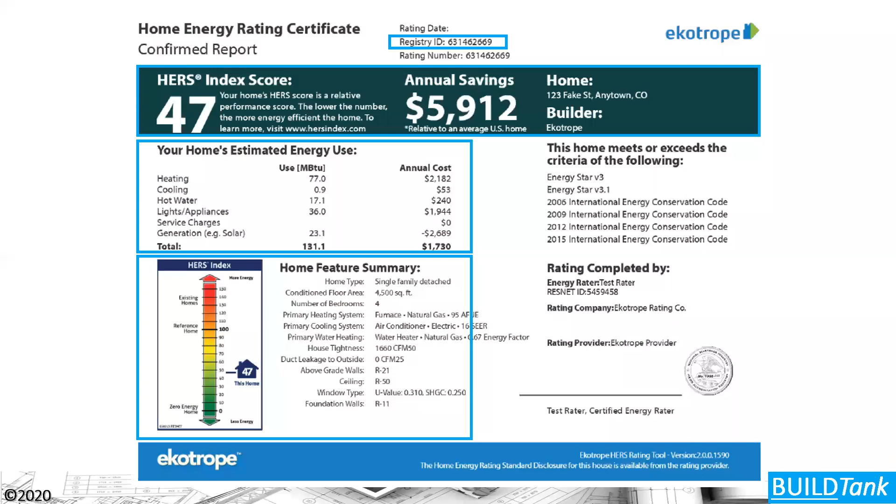And then if this house meets or exceeds any codes or programs as well, this report would be signed by the energy rater who issued it. It's important to remember that this report is not a code compliant report. If this house used an energy rating index for code compliance, you would be using the ERI report that I showed you earlier, not this report. But generally speaking, this report is given to the builders, and the builders often give it to the code official.

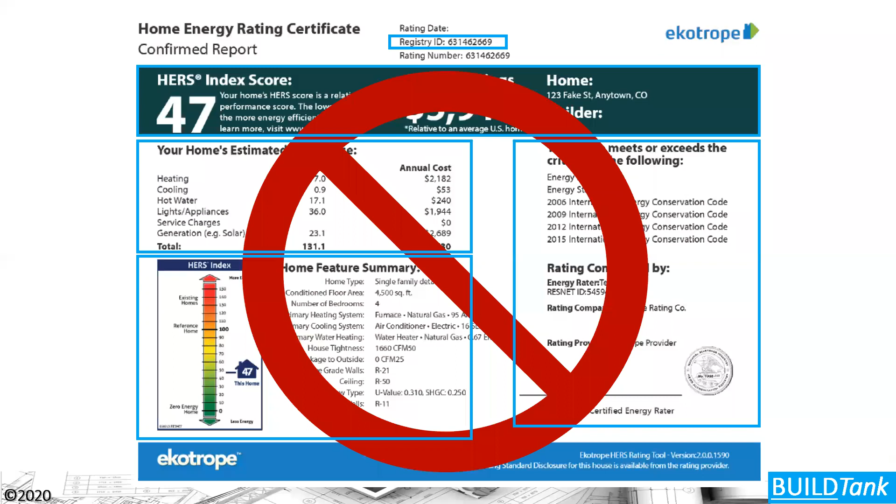You can also get public access information about some of the information of this house, like the address and who rated the house and what the HERS index score is for that house, going to a slightly different website. Both of these websites are accessible through the RESNET website if you don't have time to look at this. We'll also be handing out the slides so you can get to that information as well.

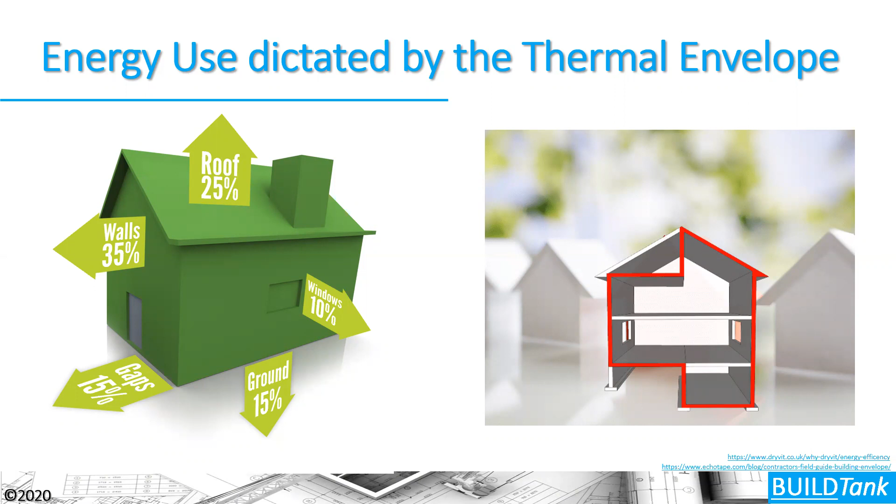So the last document that I want to talk about here is what's needed for the thermal envelope and HVAC design. Now, all of the compliance that we've done here is trying to ensure that our thermal envelope is sound, and therefore that our HVAC design, which is done before construction, is also going to work. So we have an assumption, and a goal, that our houses have consistent temperature from room to room and floor to floor, and that we're not building a poorly insulated house that is just pumping lots of energy into that house, but that we have right-sized our systems to work with the thermal envelope that we propose to build.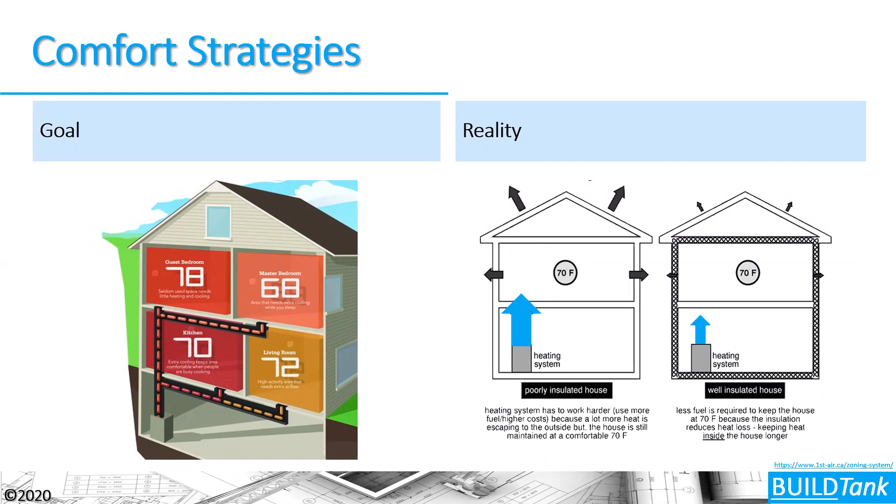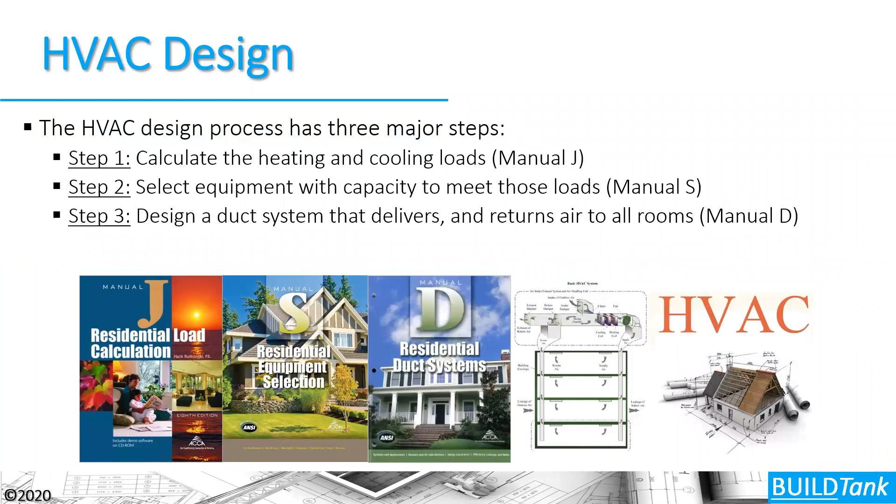So it's super important to ensure that the envelope that we propose to build actually was carried out in the field. So we need to look at the HVAC design again and see what was done at the design stage. That means that we've calculated the heating cooling loads for that house, that we've selected equipment that has capacity to meet those loads, and that we've designed a duct system to deliver those loads around the house. So we need to look at that HVAC design and, at a minimum, look at these 6 things.

There are actually a lot of other things that we should look at, but at a minimum we need to make sure that the indoor design temperatures and the outdoor design temperatures are correct for that particular environment and climate zone we're building in, that the square footage of the building envelope components are within reason, and that the R values and U values of the components match what was proposed for that particular house. That infiltration and ventilation rates were taken into account properly so that we're not oversizing or undersizing the equipment, and then ultimately the orientation is correct for that particular design, especially if it's a custom home.

So these are some of the things that we need to look at from an HVAC design perspective, and that compliance report that's turned in for permitting. And then we need to carry out things in the field and ensure that the inspections called out in Chapter 1 are actually carried out in relationship to what we learned from those proposed compliance documents.

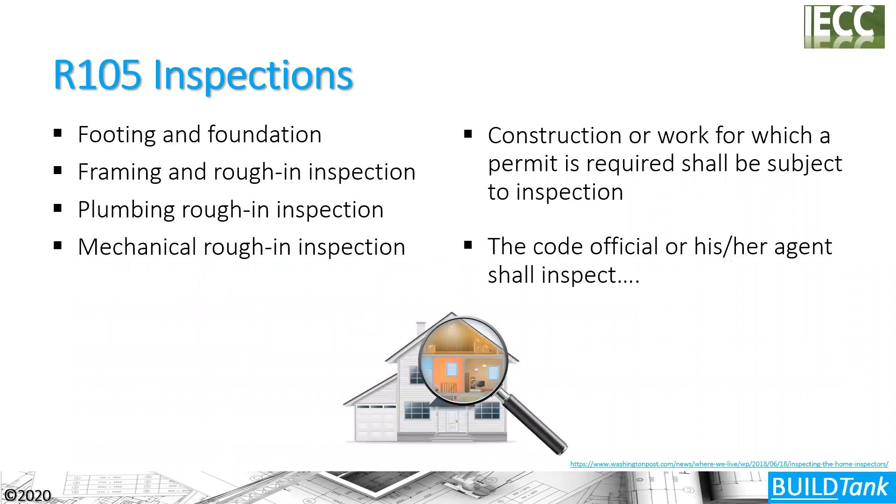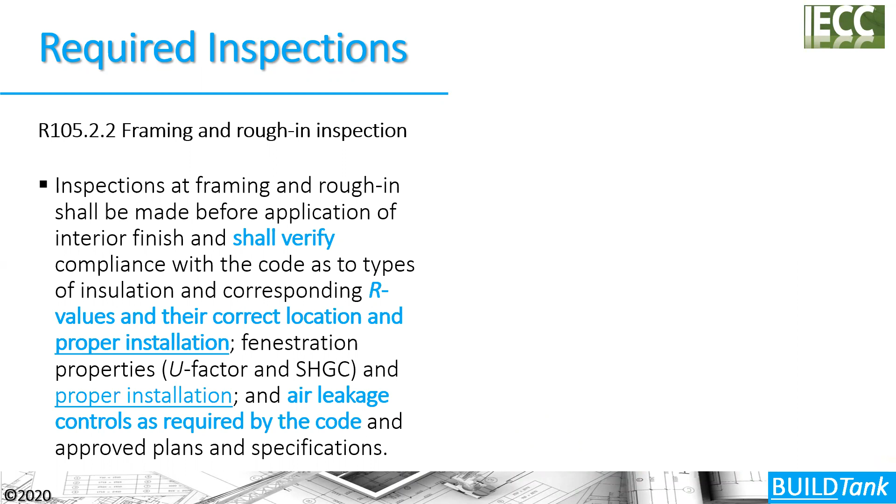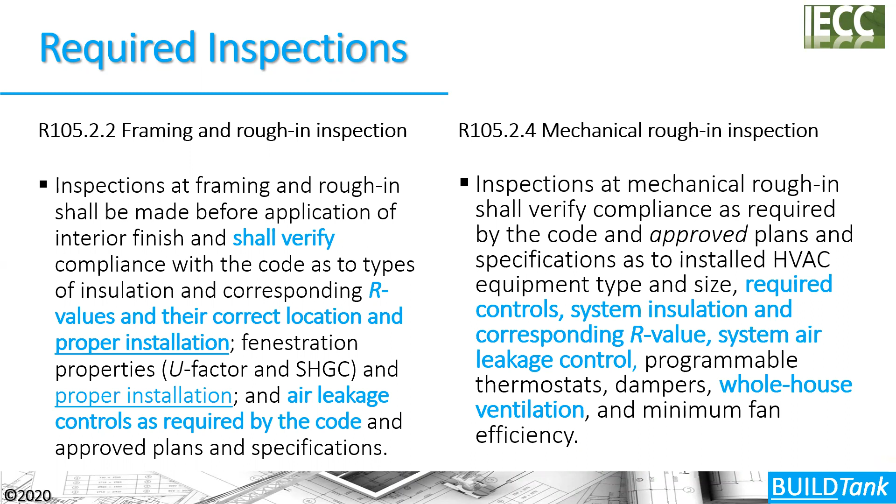Now, the code takes these inspections and breaks them down in a little bit more detail, saying at the framing stage, for example, that we have to look at the R values and their correct location and proper installation. We need to look at air leakage controls and requirements of the code. From a mechanical section, we need to look at the required controls and system insulation and corresponding R values, the system air leakage controls, and whole house ventilation as well. So these things are called out specifically that we need to look at. This whole idea of performance and how houses work is being wrapped into that inspection process.

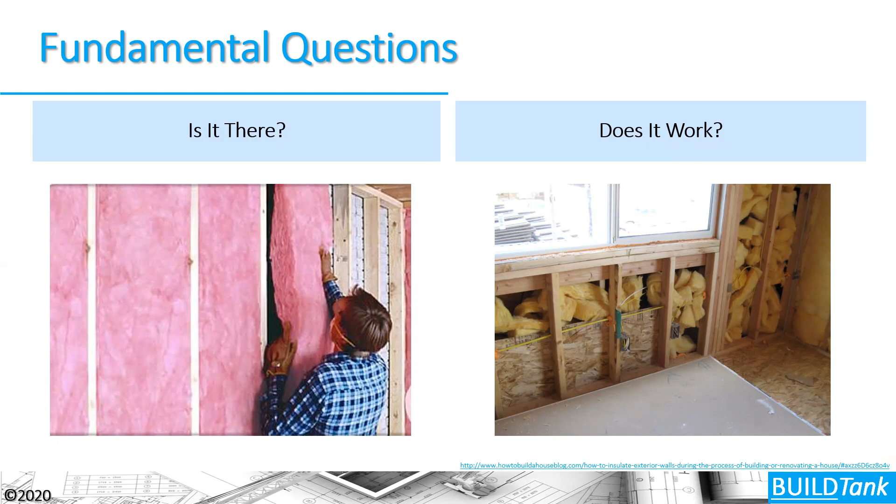Again, it can happen with insulation as well. We can't just walk into a house, see pink insulation in the stud cavities, and walk out and say it's working. We need to ask that question: as it's installed, does it actually work? Are cavities being used as trash cans, or are they actually installed so that insulation can trap the pocket of air and get the resistance, the R value that's required by the code?

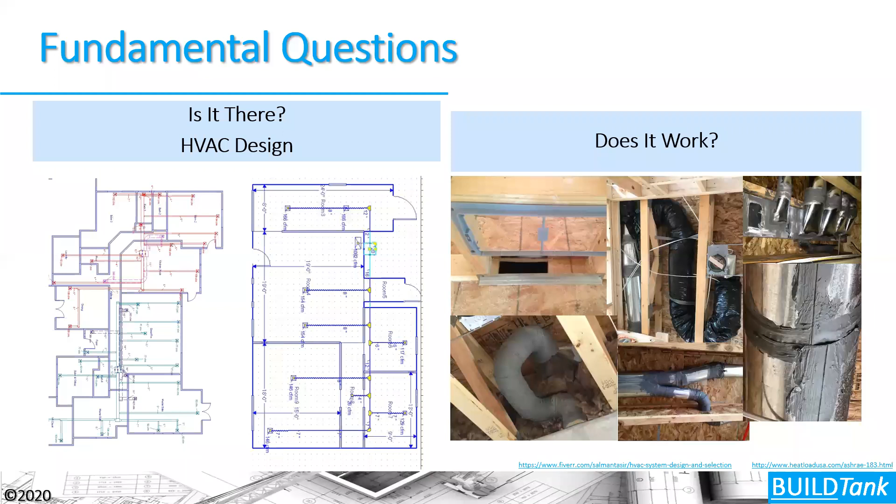Has our design been done well, and has it been executed well in the field? These are common issues that we see in the field that make it so that HVAC design will not actually work in conjunction with the thermal envelope that's been provided there. Is it there? One last thing about installation—is it there and does it work? So we need to make sure that those are being taken care of.

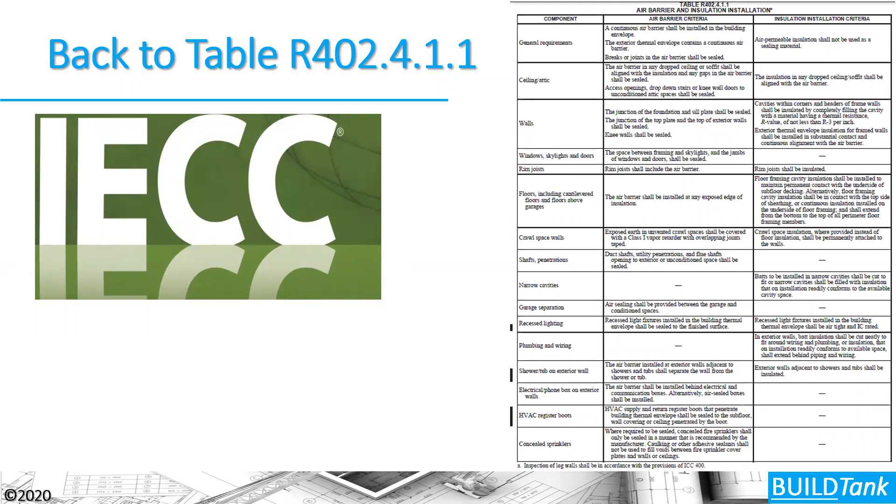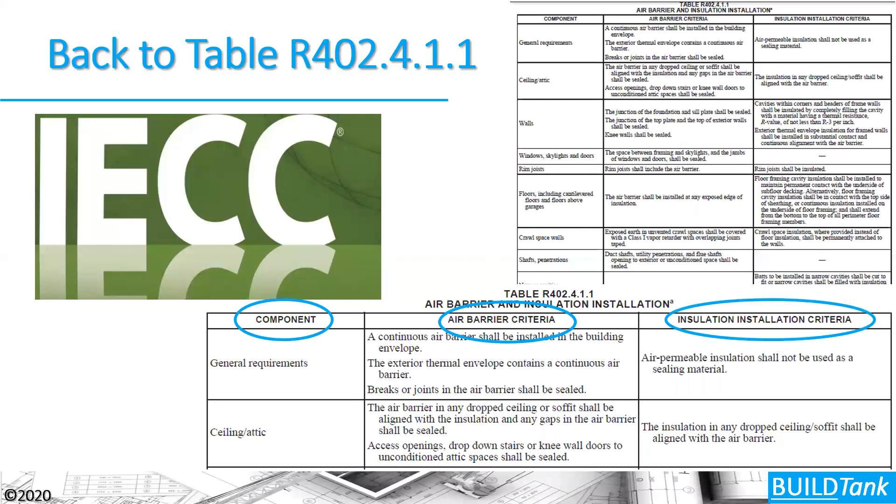So the IECC has these code compliance pathways through the code. They also have mandatory requirements in the code, and that's the other thing the inspection process needs to ensure—that these mandatory requirements are happening out in the field. A lot of these mandatory requirements are detailed in this table, a mandatory table in the code. It breaks out the components, the air barrier criteria or mandatory requirements, and the installation criteria or mandatory requirements for the code.

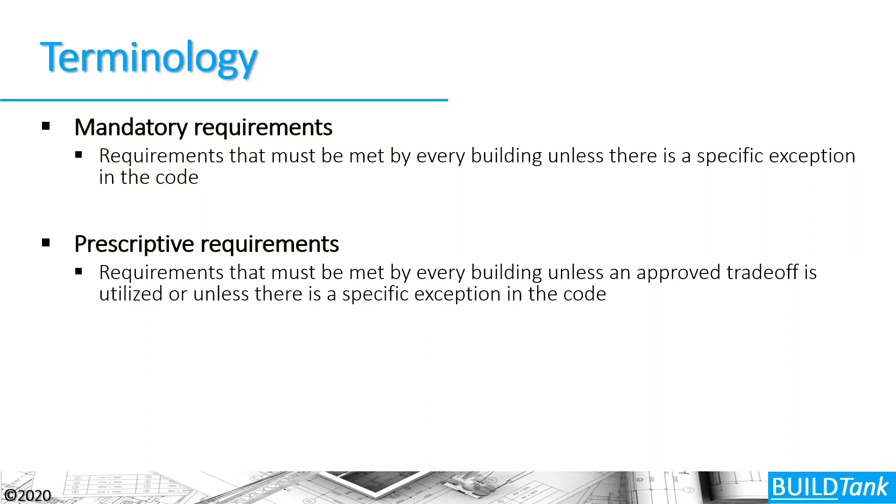But there are other requirements in the code detailed out and labeled as mandatory. These are requirements that must be met by every building unless there is a specific exception in the code. We have prescriptive requirements, and these must be met by every building unless an approved trade-off is utilized or there is a specific exception in the code. The reason to bring that up is that a lot of these prescriptive requirements, where there isn't an exception or an R value talking about trading off that R value or U value in a particular component, those prescriptive requirements become mandatory.

The code in the 2021 cycle is going to make that more clear. But right now, we need to understand that prescriptive requirements are often mandatory requirements, because the performance approach is about the ability to trade off items, and trade-offs only work with R values and U values. The prescriptive section talks a lot more about other requirements, other than R values and U values.

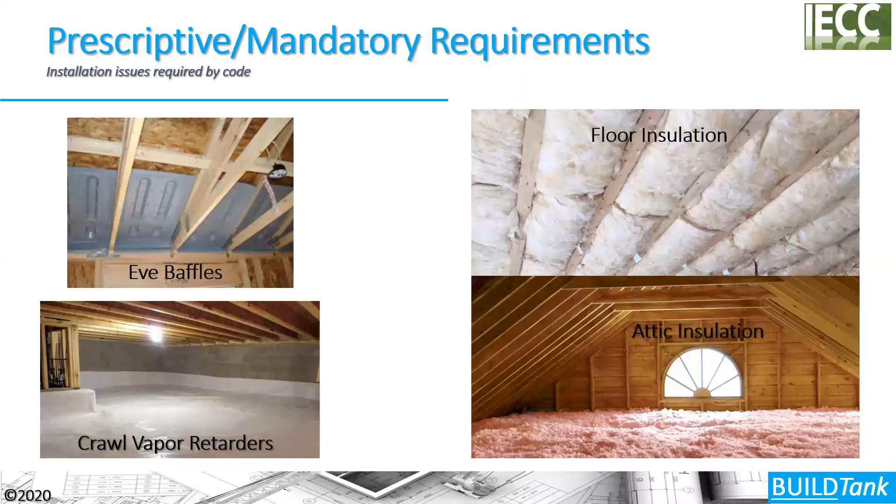For example, it talks about attic eave baffle installation. It doesn't say that if I use the performance path I don't have to install an attic eave baffle in a ventilated attic assembly. Regardless of the pathway, if I have a ventilated attic, I have to install attic eave baffles as required and dictated by the prescriptive section of the code. Same with crawl space vapor retarders, same with the way floor insulation and attic insulation are installed. Yes, I can trade off the R values and U values in the performance path of the code, but I can't trade off the way that floor insulation is actually installed there. That's governed by the prescriptive/mandatory requirement of the code here.

So in conclusion, we need to look at the required compliance reports, whether required at permitting or at completion, whether proposed or confirmed reports. We need to understand how to read them and ensure we're reading them to issue our permits and certificates of occupancy. Again, we're seeing some jurisdictions collecting reports, for example the air leakage report, but not necessarily looking at the report to see if it actually complies, and therefore issuing certificates of occupancy to houses that aren't meeting the air leakage requirement of the code.

Field inspection needs to be married with these compliance reports in a lot of ways, especially that proposed compliance report. We need to understand: is the component actually there? Have they installed the fan in the proper location? Has it been installed so it actually works? So this becomes a new mantra of this performance-based inspection process that we're trying to promote and get people to use more and more.

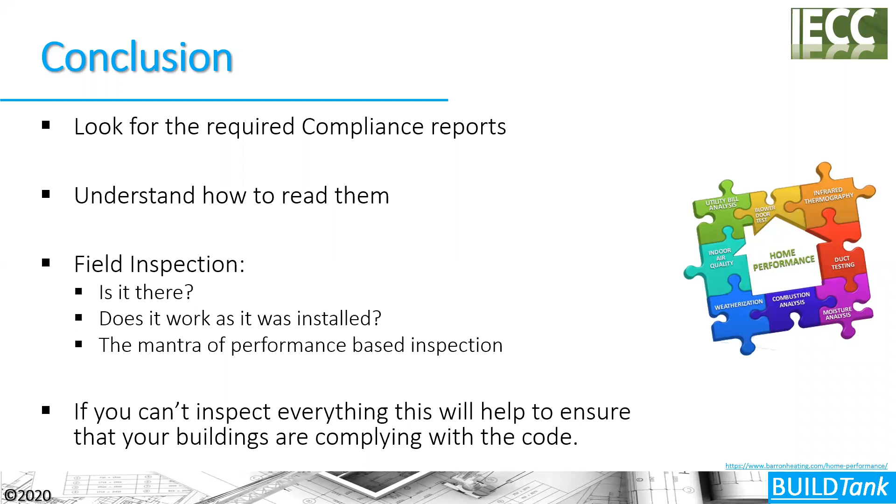And ultimately, if you can't inspect everything that the code is asking you to inspect, get these reports and use third parties to help you. But make sure you're on the same page with that third party, that everybody's making this code work and work well. If everybody's on the same page about what we're inspecting for, what we're looking for, from compliance reports to construction reports to inspection when we're actually out there in the field.